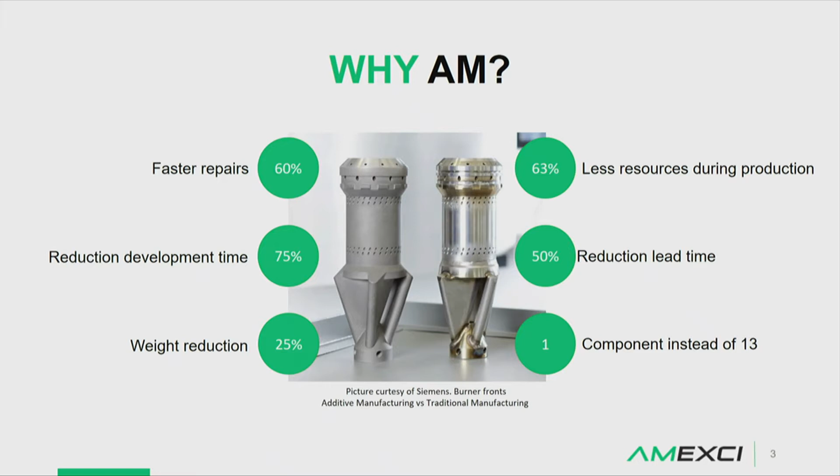What you can see here is an example where all of these nice functions and iterations have been integrated into this product - one of these bubbles is a business case in itself. But when this technology becomes disruptive is when you find all of these good cases on one single product. It completely changes your business model and how you put something on the market today.

And how does it work? I've been thinking about how complicated the pictures should be for this, but in principle, when it comes to additive manufacturing, we start with a CAD geometry of an object, then we slice that into two-dimensional layers of the same object, and then a machine is told how to recreate this object layer by layer. This is a very simple overview of it.

If we move into a more detailed explanation of the same process, you can see there are more and more things you need to take into consideration. I think it's important to highlight that this is a quite complex manufacturing process, where manufacturing the single part itself is just one step of the way. To actually use this as an industrial manufacturing method, you need to look at the entire chain end to end - all the way from your materials to how you actually verify and certify your component if you want to use it in an industrial environment.

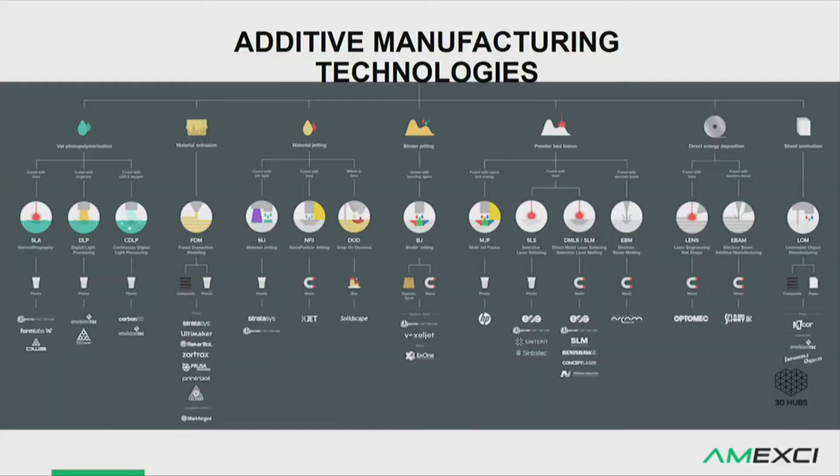Today we will be focusing very much in this area around a specific manufacturing technology that has been, I would say, an enabler for different industries, where I believe Siemens and NASA, who are here today, are great examples of how this can be gone about.

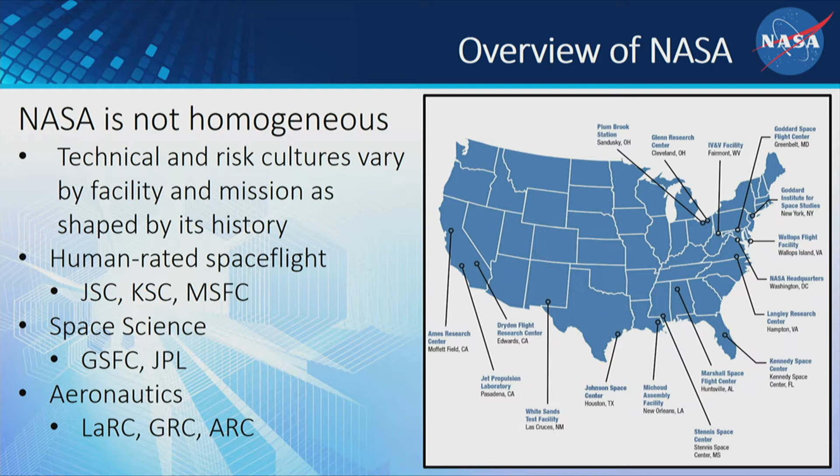What that leads to is a pretty broad diversity in technical cultures. There's a big difference between human spaceflight technical culture and aeronautics technical culture, and in how we perceive and handle risk. How much risk are we willing to take? That governs quite a bit about how we approach our additively manufactured philosophy, and how cautious we are. Those cultures are broad across the agency.

Brian and I work at the Marshall Center, so we're going to be coming at this today primarily from a human-rated spaceflight perspective. That's our point of reference.

In space-related missions relative to additive, NASA has broken down along two lines of thought. One we refer to as our for-space activities, which are efforts primarily used for access to space—rocket engines, structural components for vehicles, those types of things, essentially how you get to space. Then there's a whole other line of work relative to the actual in-space, which in the long term we believe is probably the game changer for the far future in terms of long exploration missions to deep space.

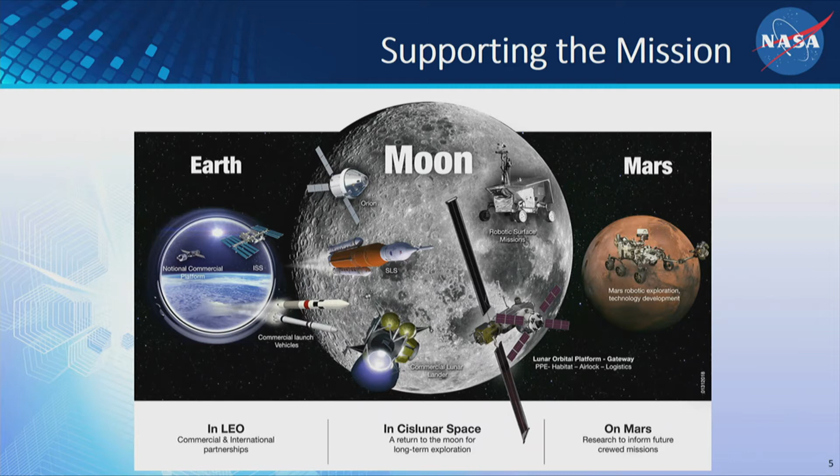A lot of what we are working on currently—the Orion spacecraft, the Space Launch System, our commercial launch guys—all of these things are leading towards continued support of the space station and then onward to near-term efforts at the moon. So those are the missions that our additive efforts are supporting.

At Marshall, we've been tinkering in additive manufacturing for the better part of 25 years. Long before additive manufacturing as a term came about, the key words were typically rapid prototyping and that type of thing. So we were working in that quite some time ago. I remember helping to string cables together from our Unix machine to a small machine from a startup company called Stratasys, who was getting started with their FDM technologies, and we were a part of some of that early work.

Our objectives in additive are the same as most any organization trying to get their hands around what additive can do for them. It's certainly a matter of decreasing production times and costs. From our perspective as a certification agency, we spend a lot of time trying to understand how do we certify a part—what does it take to decide a part is safe enough to go fly, and how do we do that in a standardized manner?

So that means developing processes and characterizations, sharing knowledge, getting data together to promote a smart vendor base, and then the standard work of additive in terms of designing well-optimized components and figuring out when is an appropriate application for additive. Not every part should be additive. There are times when additive is advantageous, and there are times, especially at this point with the hype, when organizations or designers jump to additive when they really shouldn't. So we try to help with those decisions.

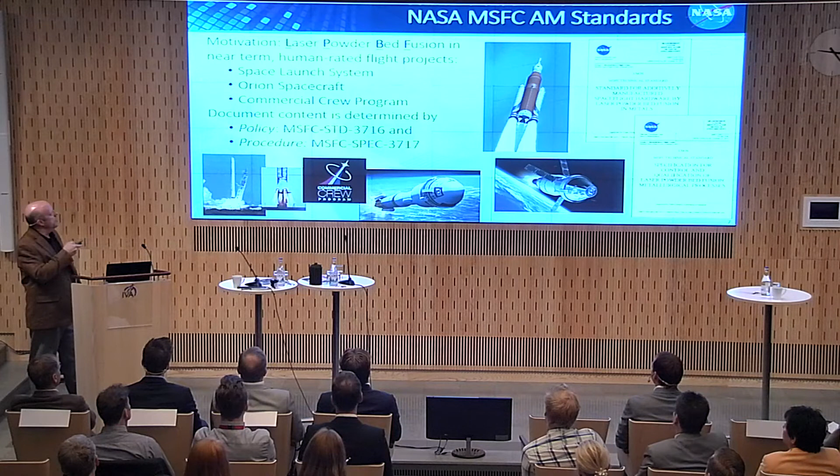These groups were really interested in taking advantage of additive manufacturing to reduce costs. One of the biggest pushes in the Space Launch System vehicle is to reduce the cost of those engines, for example—those are engines that flew on the shuttle. If you recall, the shuttle came back, so that was a big part of the development and understanding of those engines; they were reusable engines for a returning vehicle. This particular vehicle, unlike the SpaceX vehicle, is not coming back. So how do you make that engine cheaper, faster, and considerably cheaper—that's a very big motivation.

So what we decided to do was put together some standards. We needed to have a place to start, a way to frame the discussion. So we decided to take our shot at putting together a standard, and these two documents evolved from that. It took about 3 or 4 years to bring these to fruition. One is what we refer to as a standard—our Marshall Standard 3716.

And it handles things like policy. So that's where you look for information about needing a quality system in place, or how you handle material properties, or what you need to do relative to controlling your process, or providing a non-destructive evaluation level for hardware, or classifying parts, those types of things.

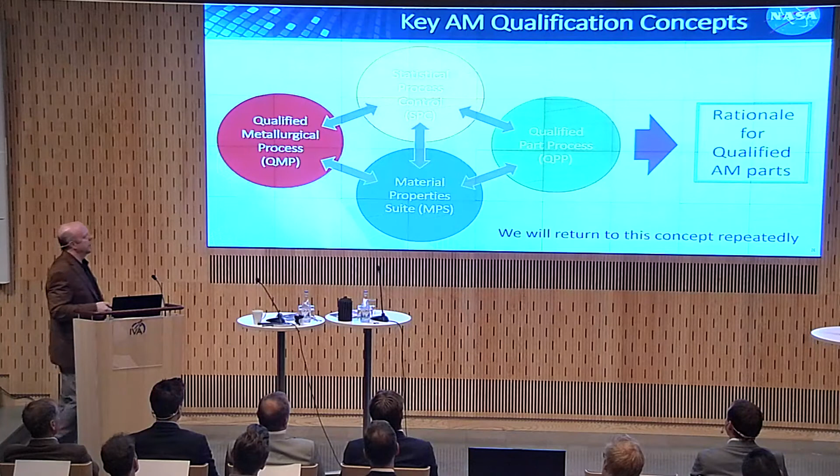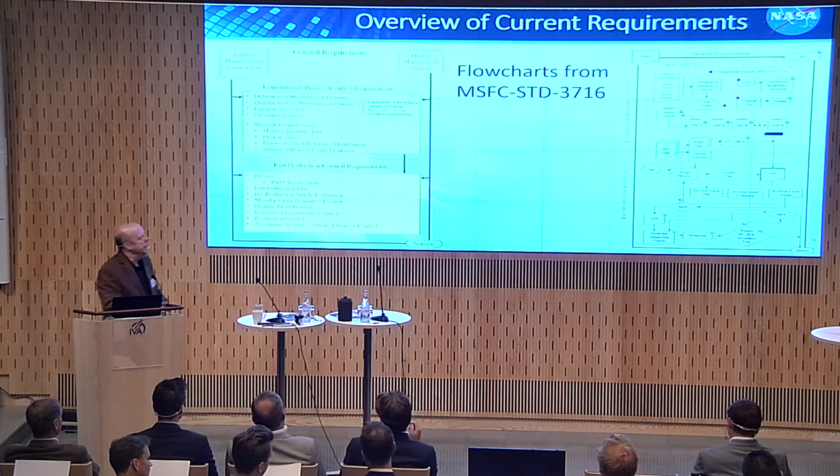So do we need to understand all of that stuff before we can use additive manufacturing sensibly? In our opinion, before you go to a point of introducing additive parts into a system of value, or certainly a system with safety implications, our answer is yes. You need to understand that.

These are concepts that are fundamental to the safe and proper implementation of additive. It doesn't mean that you have to have all of this information sorted before you begin your development and your research in additive, or begin producing parts, or begin doing development activities. We don't mean to imply that at all, but by the time you're ready to take a part and put it on a vehicle of some form, or apply it into service where it has ramifications, yeah, we believe you should understand these things. Does that make sense?

So we don't feel that you need to be able to read and see everything that's going on this screen, but these are flow charts that are in the beginning of the NASA standard, and we're going to broadly use this to guide our discussions this morning.

The first part of the discussion, or my discussion, is going to be on these, what we refer to as foundational process controls. So these are things I've mentioned before, where we talk about qualification of metallurgical processes and try to wrap our arms around how do we deal with material properties in additive, as well as things such as equipment control, quality management systems, and overall plans.

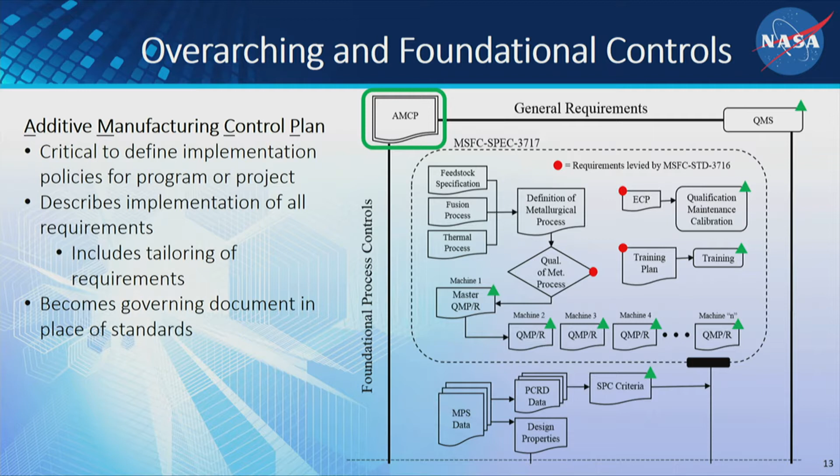So, general requirements and foundational controls. One of the things we have found that's crucial if you're going to establish an additive process at your company, or on a given product line, and say, okay, I'm going to produce this part and put it into service, is having an understanding of how you're dealing with additive in an overall sense.

Having a framework, what we think of as a control plan. In response to our documents, it means you go through and demonstrate in your control plan that you've understood the requirements and how you plan to meet them. But in the larger sense, it's primarily documentation for your organization to say, this is how we're handling additive, this is our policy, so policies stay consistent, engineers know the framework they're working within, and quality organizations understand their role and how all these things interact. So we think having a control plan is a very important item.

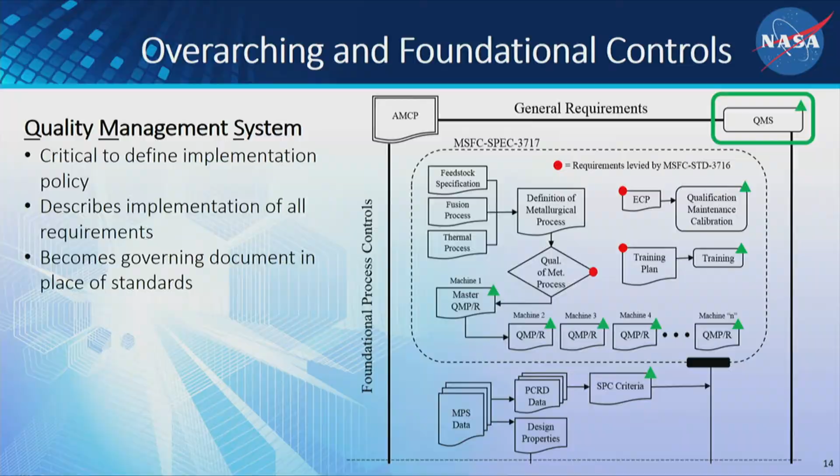Equally important is having a quality management system that is well integrated into what you're doing, both at the engineering level and the production level. In our flow chart, we show quality and this control plan as big overarching entities. Having a quality management system in place is a critical item. If you have a hole somewhere in your manufacturing process where your quality management system is not keeping up with what's going on, you have a fundamental problem. So that needs to be an overarching concept.

Equipment and facility control plans - we're going to talk about these two boxes here. It's a huge topic in the standardization world: how do you calibrate and qualify these machines, how often do you evaluate them, what exactly is an appropriate maintenance schedule for an additive machine. We require that you have a plan stating your policy for doing it, because at the moment there is not a clear answer in the standardization world. Each organization is figuring that out on their own, and from a NASA certification perspective, we allow that. We just have to know what it is, what you're doing, and if it doesn't make sense to us, we'll push back. But we have to know what you're up to.

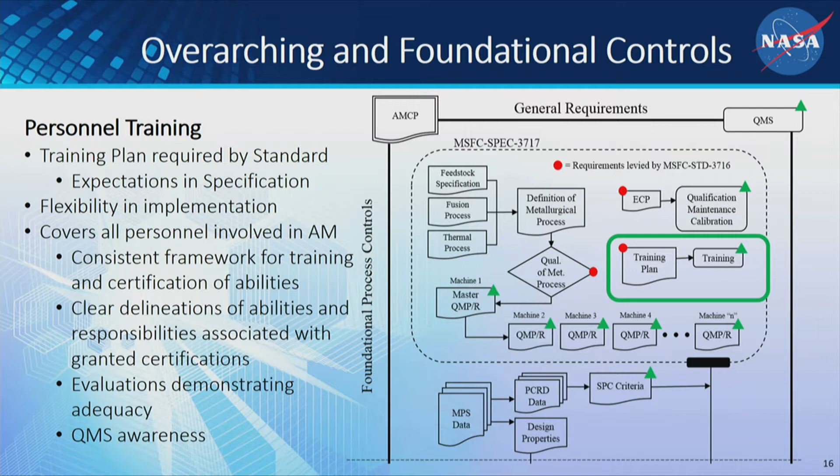So what we come up with is we define a metallurgical process. When it comes to powder bed fusion, there are metals certainly, and there are non-metallics as well. This standard is a metallics standard. Most of our work for critical structures at the moment, that Brian and I spend a lot of time with, is metallic.

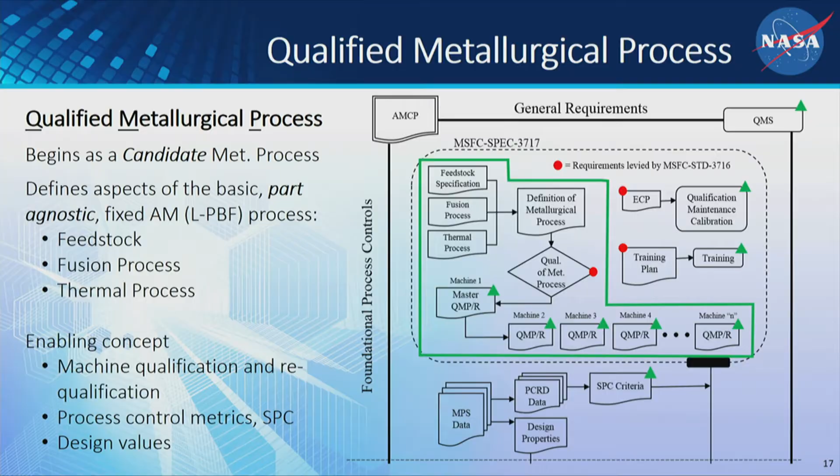But the idea is to say, let's come up with a metallurgical process that's based on 3 core items: the feedstock going into it, the fusion process, that's all the parameters we just discussed, and then the post-build thermal process. So those are the three core items that we think of as an additive manufacturing process, or metallurgical process for additive. And so once you've established, okay, I have a spec for my feedstock, I've come up with a set of fusion parameters that I like, and I have a thermal process that I believe can evolve microstructure after building the part, then I've established a definition of my metallurgical process, and I can go try to qualify it.

So that's the idea, and this is an enabling concept for us, the way we think of this, because having these items defined and qualified and having metrics against them, that's what enables us to work the other problem areas, such as machine qualification and requalification. How do you set up process control metrics? How do you come up with design values for your engineers to use to put into parts? So we consider this to be a very kind of enabling and fundamental concept.

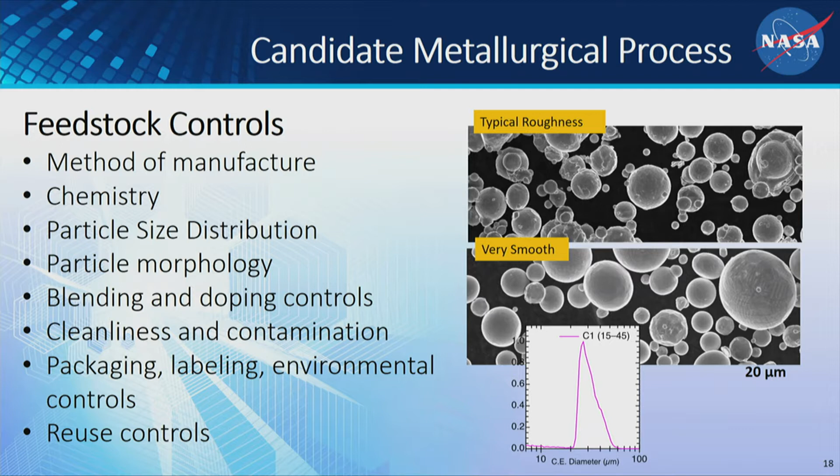So we'll go through those 3 core pieces very quickly. Feedstock controls. There's a lot of work going on in how do you understand powder for powder bed fusion type processes. At the moment, we've taken kind of a loose hand on that and said, we have a number of things that we want you to control relative to your feedstocks. We're not going to tell you what those controls have to be per se, but we say you do have to, for example, understand how your powder is being manufactured, chemistry controls, particle size distributions, morphology or shapes of particles, blending and doping controls, cleanliness, contamination, how you package it, label it, environmental controls, what you do relative to reuse if your environment has reuse of powder and that kind of thing.

So we have these controls in place and require that fundamental core piece to be defined and fixed relative to that metallurgical process. The next piece in our candidate process is, how do you come up with the fusion parameter set that you believe is going to work? So there's an image stolen from Fraunhofer that's similar to the one Edvin showed relative to the powder bed fusion process. So how are you setting power of your laser, scan speed, all of those types of things relative to your process?

And what's most specific about our metallurgical process is that we tie this all the way to the serial number of machine. Okay, so it's not generically, oh, I have a make and model of this machine, so therefore I come up with a set of parameters and I can dole it out to anybody who happens to have one of those machines and assume that I'm good. We don't do it that way. We have a candidate process, and then we qualify each machine by serial number. So those fusion controls, there's a long list of things that are in it. Everybody is, folks are likely aware that the quantities of settings that are available relative to this scenario are scores.

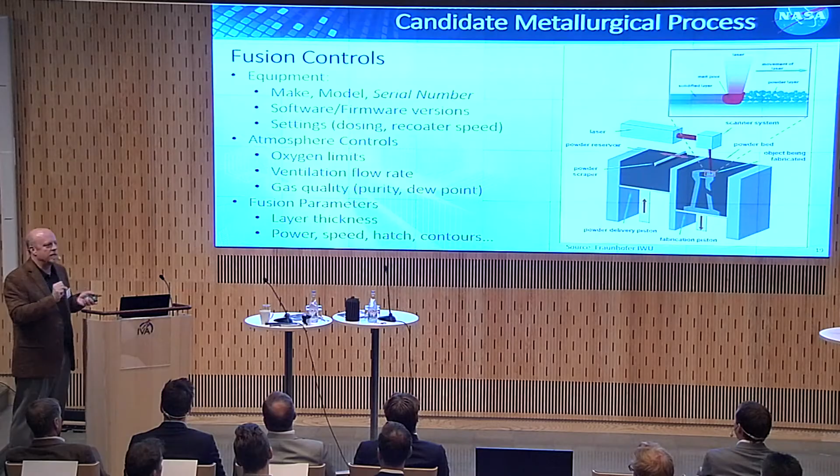Ventilation considerations. Brian and I have been tripped up by ventilation problems probably as much or more than anything else. How are you ventilating the bed where all of this process is going on? Some of the alloys we work with have a tendency to produce a good bit of soot, which interferes with the power of the beam getting to the bed, creating defects and causing problems.

So things like ventilation and quality of the gas are very important. We put those together into one box that we call our fusion controls, and we ask that all of that be well defined and well locked down.

The other fundamental concept behind fusion controls is that the additive machine works on the idea that I specify a power, a speed, a layer thickness, a set of parameters. I may have multiple sets of parameters - for example, a set used when the machine is making the outside surface of a part, and a different set when it's filling the inside to fuse the solid and make the part solid. But it's still a fixed set of parameters for different conditions - I know what they are, and it's going to do the same thing each time.

What I need to keep in mind, though, is that not every part is the same. So those parameters need to be what we think of as well centered in a process box.

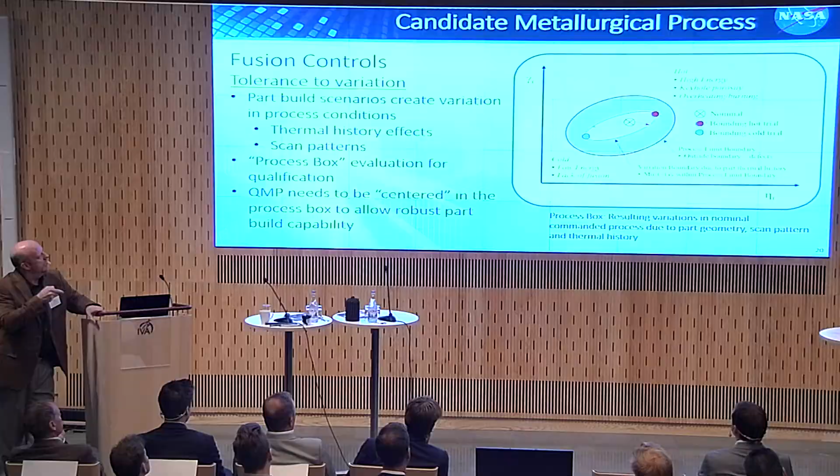If that X represents where I'm going to operate my machine for a given set of parameters, I want to make sure that when I declare my process, this red line - in this kind of pseudo process space, representing various parameters that might change the process from being hot, with high energy leading to things like keyhole porosity or overheating and burning, versus cold, with lower energy leading to lack of fusion defects - I have this box, so to speak, a parameter box.

I want to make sure that when I place my set of functioning parameters, it's well centered within that box. Let's think about it that way.

I don't want to have a set of parameters sitting right over here on the edge, because if I have a geometry in my part - say a part with very heavy sections where the laser is going to be spending a lot of time in local areas and heating things up - then even though the process looked good when I qualified it, when I did my part it wandered out. I don't want that. I don't want that at all. So what I want is a process that's well centered in this box.

So that it can tolerate a number of different part geometries and scenarios when I'm building, so that my qualified process is as robust as I can have it. So that's the other idea I wanted to get across.

Brian is going to talk briefly about the idea and some of the challenges of very interesting work going on - kind of the final goal of a lot of the additive developers - which is in situ process monitoring and the ability to do real-time control of processes. We're excited for that, but it represents a challenge to us, as Brian will talk about.

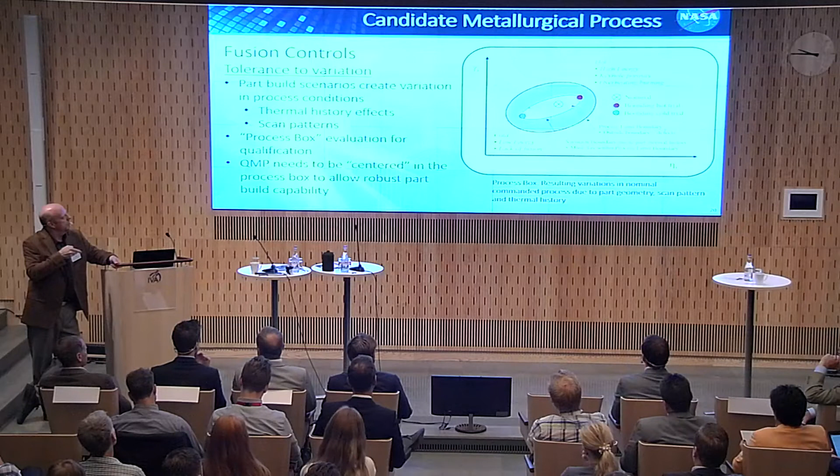So that's important to keep in mind relative to our ideas, that we work on a fixed process, and that we work hard to make sure that that's centered in the box. And then, as Brian will discuss in part controls, you got to go back and verify that on any given part that you come up with, your approach to build an additive.

Yea, verily, where I chose to operate produced the part as I intended it to. So there's two parts to that. Thermal process, just very quickly: we are not fans of putting parts into service with the microstructure that is created by the additive machine. Microstructures that come out of the additive process have these interesting features. You can see literally weld beads, crisscrossing, and all that kind of thing going on. Very complicated, often non-equilibrium microstructures. We're not a fan of putting those into service.

And so we have a generic requirement from our thermal process. We consider it core to the metallurgical process that you're not done when you finish building the part. You've got to have some way of evolving that microstructure. How do you move that microstructure from this very high residual stress scenario, with segregation in elements and all of that kind of thing, to something that is more appropriate for service conditions?

And so we consider that to be an important part. So once we've established it, what I've told you about are the core pieces of what we think of as a candidate process. What you got to do, if you get the candidate defined, your next step is to qualify it. How do I qualify it and decide that that process is actually good? So we have maybe three steps to that.

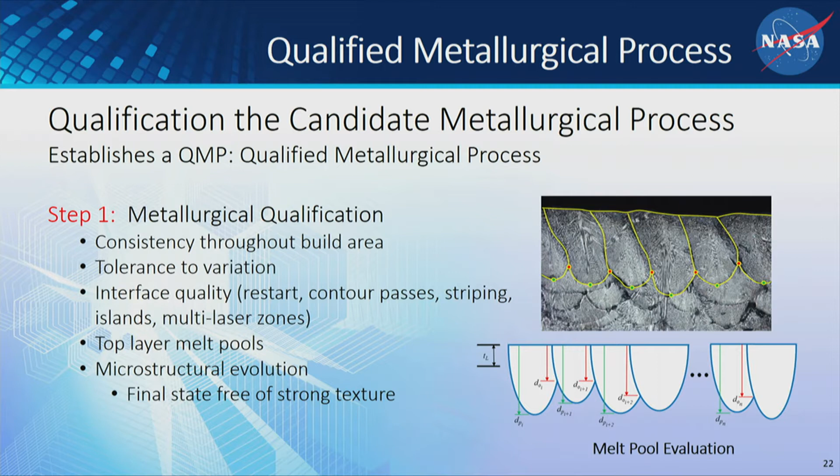One is metallurgical qualification, and that has to do with understanding how good am I actually building material at the metallurgical level. Do I have consistency throughout my build area? If my build area is, say, 200 centimeters square, how do I know that all of those areas are producing material of equal quality?

Understanding, like we discussed before, tolerance to variation. In other words, I don't want to qualify my process where I can build little cubes, great, or I can build a tensile sample, great, but I can't build a thin wall, I can't build a thick wall, or whatever. So we've got to understand, can it tolerate variation?

There are a lot of interfaces in additive parts when you get down into the understanding. For example, I talked briefly about contour passes, which are the passes that the energy source will make around the outside of parts to create a surface. How you have the interface between that and your fill areas, that's very important. It's a great place for porosity or defects. Certainly things such as if you have a machine or a part scenario where it requires a restart of the process, that's a critical scenario that's got to be qualified.

Methods of filling, whether it be EOS uses the term striping, islands are used in some of the Concept Laser machines, where the machines are quickly moving to the point where we're going from a single laser to multiple lasers. And so now you've got the concept of: are the lasers going to share the burden? And if so, how do they negotiate that? And do they negotiate that well? And do you end up with problems? So all of those types of things are important to us from a metallurgical quality perspective.

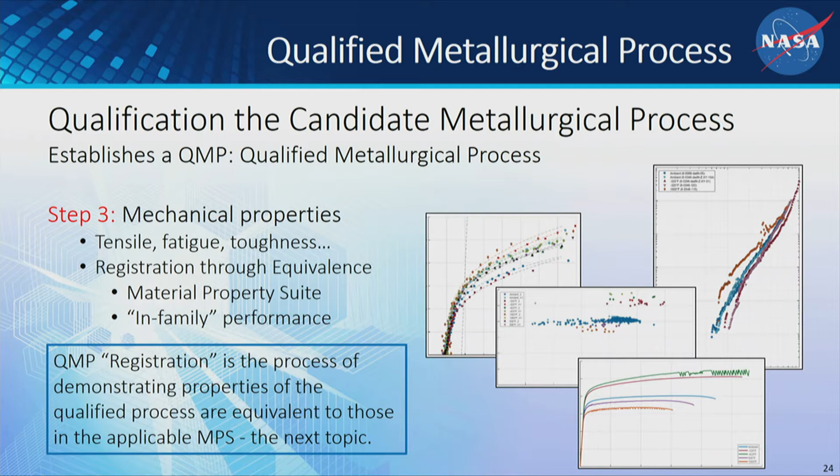And thirdly, if you're qualifying this metallurgical process, you've got to understand the properties that process renders. So by the time I have built my material, I've ensured that it has good metallurgical capability and provides good surface and detail resolution. Then you've got to decide, does it have the properties? Can it actually do its job for a given part? And how do I figure out what those capabilities are to convey that information to my design community so they can understand their capabilities, and that we've qualified a process that can survive the environments we ask it to.

In order to do that, we focus very hard on this idea of a material property suite. It's a little bit new — not a new concept by any means, but integrating these concepts is a little unique, particularly in the metallics world. It's not that unique if you're talking to the composites guys who work in process-sensitive materials and realize things might be different each day if they're not careful. They're kind of used to dealing with it.

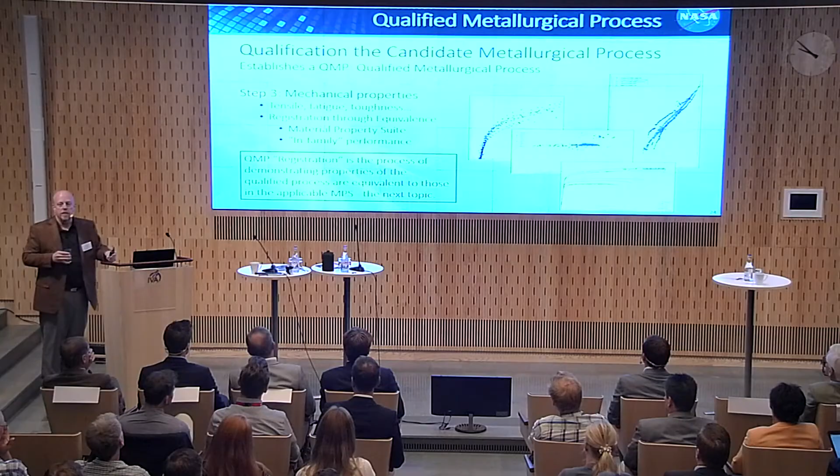But what we've decided is that we need this kind of material property suite. The idea is that when you're registering your process, when you're registering your candidate by having it qualified, this registration process is how you demonstrate that the properties being produced by that process make sense relative to my design values in my bigger space. So that's tying things together.

So the material property suite, the way we've devised it — and again, I'll throw the caveat out there, this is how we're working the problem, it's not the solution, but it's how we're working it. This is a scenario that, again, we find the standards community thus far is not tackling. There's a material property community within the United States that handles development and standardization of methodologies for materials for aerospace applications, which is wrestling with it, but that's the only organization I know of actually trying to work this. Generally speaking, this is worked internal to companies, and the degree and rigor to which they handle it tends to vary with the culture of the company.

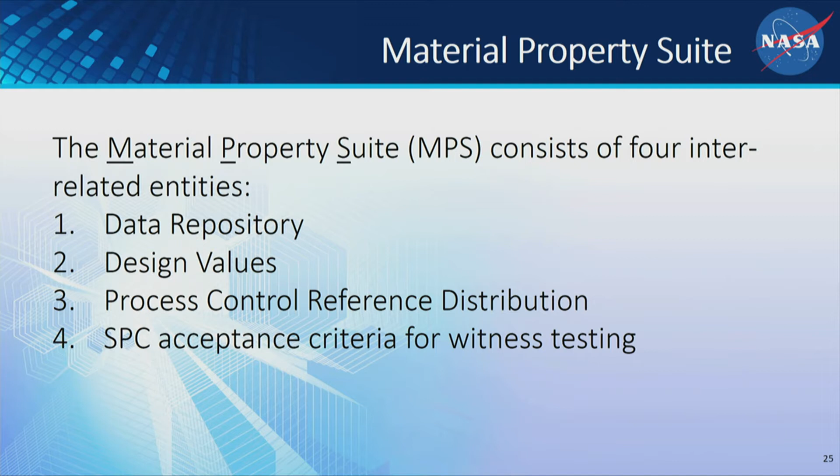So we have four items in there. We have basically a data repository — that's where we have all of our data sets. We come up with a set of design values; that's a core piece of this suite. This idea of a process control reference distribution is pretty critical — that is, how do you understand what the nominal in-family behavior of your additive material is? That's going to be a decision maker for keeping processes in check and supporting the rationale for using a given set of design values. And from this reference distribution, we set statistical process control acceptance criteria for witness testing and other purposes.

So that's the idea. The data repository includes data from all kinds of places, whether it be qualification testing when you're building up your fusion process and you've locked it down and you're qualifying this process — you have all of that data. You also have material characterization activities that go on explicitly, so you need things like crack growth rate curves for a particular material. Ideally, you're not going to invest in these types of things until you have a qualified process.

We see that turned upside down quite frequently, where people generate all of these types of data — fatigue data, crack growth rate data — and you ask a general question going back: well, how did you qualify that process? Why do I know that process is good? Why is that data good? And they're like, well, we didn't do that, we just started characterizing. And so then you kind of start backing up.

But you get this data from a lot of different places, what we refer to as pre-production article evaluations. That's an important source of data, because that's taking data literally in situ out of parts that you've created. That helps you understand the correlation between coupons from generic material characterization versus the quality of material that actually came out of the part itself. Are they actually the same? So that correlation is critically important.

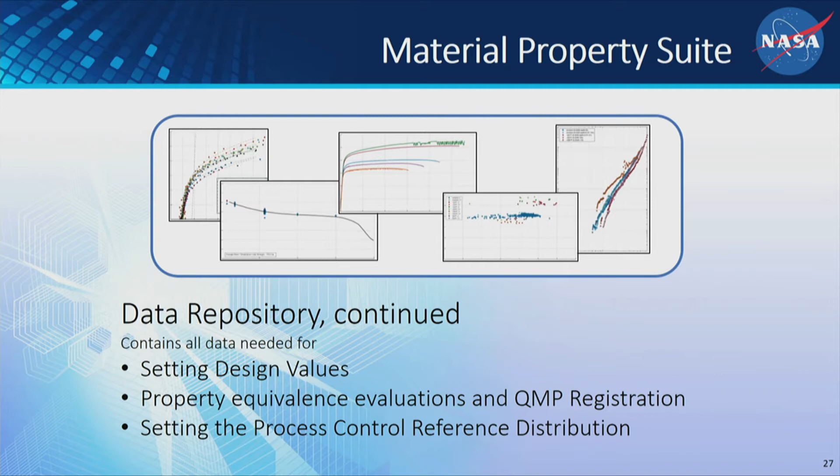The other aspect to the data repository is it gives you the data necessary to set your design values. You want your design values to be reflective not only of characterization data that came from coupons, but you want to make sure those design data also represent data coming out of parts and other types of geometries. It's a process-dependent material property — it can be. We try to minimize that through the metallurgical process we described, but you still have to understand how those properties vary.

By incorporating data from all types of sources when setting design values, that's the approach to take. The repository also gives you the data you need to understand this equivalence concept. When we say equivalence, we mean I have a set of properties generated from my new machine that I've qualified. How do I decide whether those properties are appropriate to use in my design space, and that all my prior design values still apply? We need some way to do that. We can't restart our design value efforts every time a software version rolls over or a new machine comes in. Additive technologies are moving too fast for that, so coming up with equivalence measures is very important.

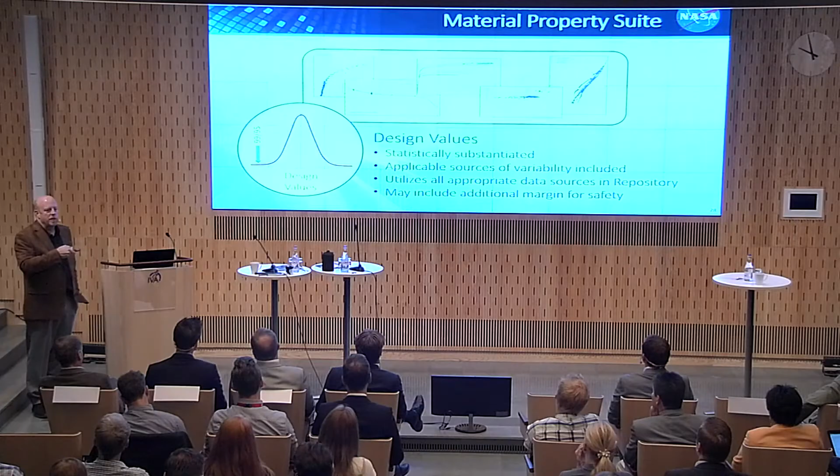Those are basically statistical evaluations to show equivalency between data sets, so design values from the data sets are statistically substantiated, typically down at the tail of a property distribution, at the 99 or 95 limits, where they're defined to lie. We include all applicable sources of variability when looking at design values, like coupon data, pre-production articles, characterization data, witness data, etc. And if you're smart about it, at this point in additive, you're not going to tune that right to the edge. You leave yourself a little room for learning something new, because that's going to happen, guaranteed.

The other thing we do is what we refer to as process control reference distributions. It's an important concept to us, one we're hoping will show up more in industry standards. It's not terribly unique—it's basically coming up with a descriptor of this larger data pool that says, relative to the witness coupons, what does the process look like when it's in control? What is the average value it produces for a given property, and how much scatter is typically there when the process is in control? Understanding that family is very important to us.

And three minutes? Okay, I think we're not too bad. Not too bad.

The idea is we want some sense of mean and scatter, so that going forward, producing parts on a daily basis, we have a way to say yes, that process is in control—I'm looking at it and it is in control, it's in family with prior work. What we'd like to avoid—well, let me cover this real quick—based on that, gives us this SPC criteria for witness testing.

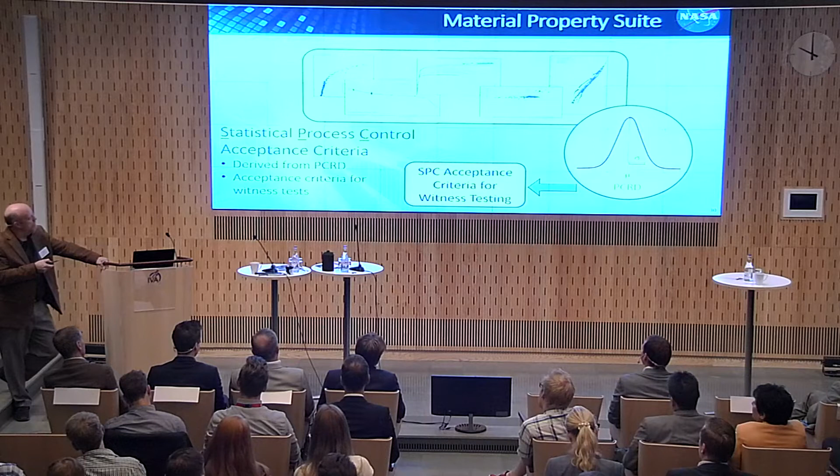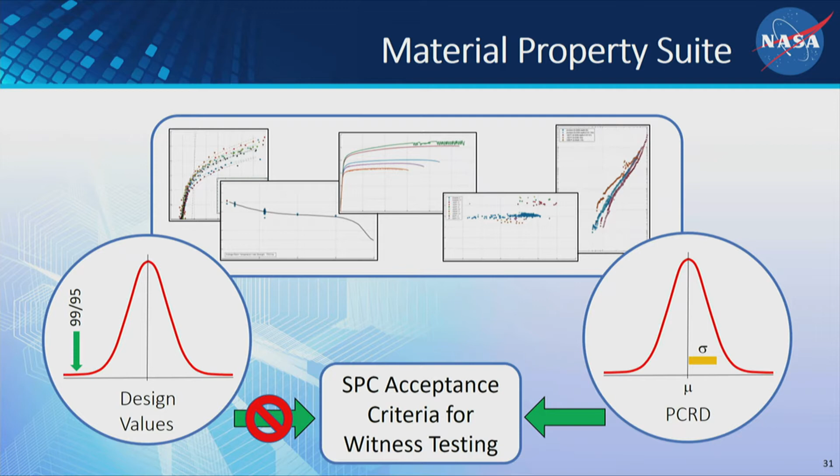What we find too often is that the acceptance criteria is tied to these design values or to some minimum number. In other words, they say, well, my guys are designing to this number X, so I'll pull a tensile bar, and as long as it's greater than X, it must be good. That's the concept we're not excited about, but that is the tradition, honestly, in metallics—not as much in the composites world, but in metallics it is the tradition. So we're swimming upstream against tradition trying to change that.

The problem, particularly if you literally set it against a design value, is that this is set way down here—it's a low, easy bar. And quite often, for conservatism, we even add some pad to that from a design value perspective. So what that means is my process can walk all over the place before I flag it. In other words, I can really move the mean of that population before I flag it. And we don't like that.

We think it's quite important to say, I know what the family of data is, and I'm going to watch my witness testing on an ongoing basis and plot that against it. It's the control chart scenario, SPC, Statistical Process Control 101. That's all it is, we're just asking for some of that to be incorporated. You wouldn't think that would be quite as big a deal as it is, but it can be hard to force folks to do that because they're not interested in all the logistics, and it's a challenge.

So the idea is not to base our acceptance on these spec minimums, but instead come up with, for example, an acceptance range on mean, an acceptance range on variability, maybe a limit on the lowest single value, and use that family to understand how your process is doing, not just saying, oh, it's greater than the green line, it must be good. That's our idea.

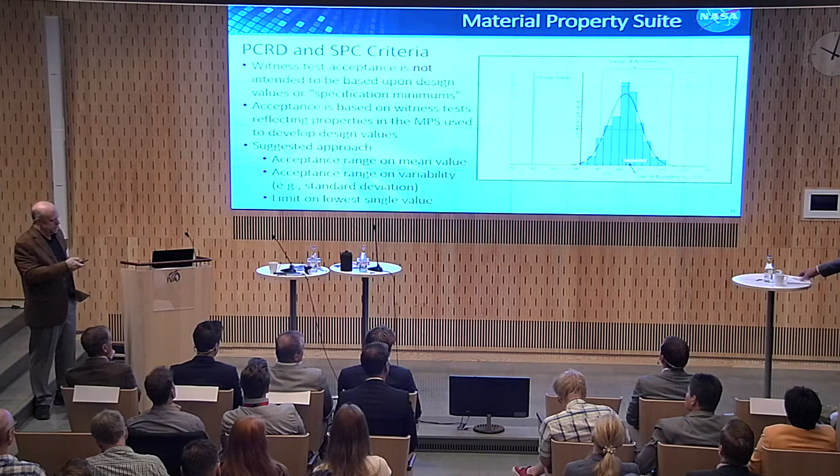So what we've done here, we've talked about qualifying a metallurgical process, feedstock, fusion controls, thermal processing. Get ourselves a fundamental process that's producing material we like and that does so with flexibility, so it can do it not only in a cube or a coupon, but across a large array of environments, thermal environments, part environments, and that kind of thing, so we have confidence that in general our process will produce good parts.

Utilize the idea of understanding that process and putting it under control, and tying the material properties back to that metallurgical process through what we refer to as that registration, and monitoring the properties through SPC. So we end up with this triad, and that's how we decide we're going to keep our process in control, and substantiate a given set of design values that are in use by the engineering organization. So that gives us a few check marks on our checkpoint here.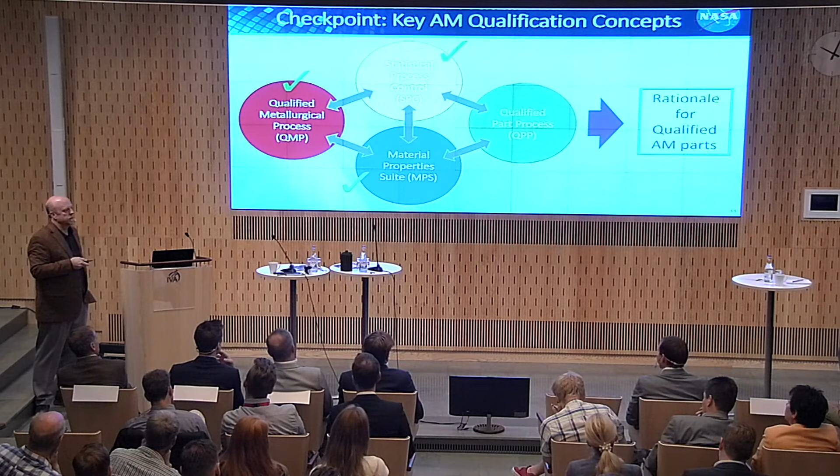And what Brian is going to do, he's going to pick up and say, okay, how do I take this concept and move it into real world parts? How do we take all of these fundamentals and start making real world parts out of it? So that is where we are.

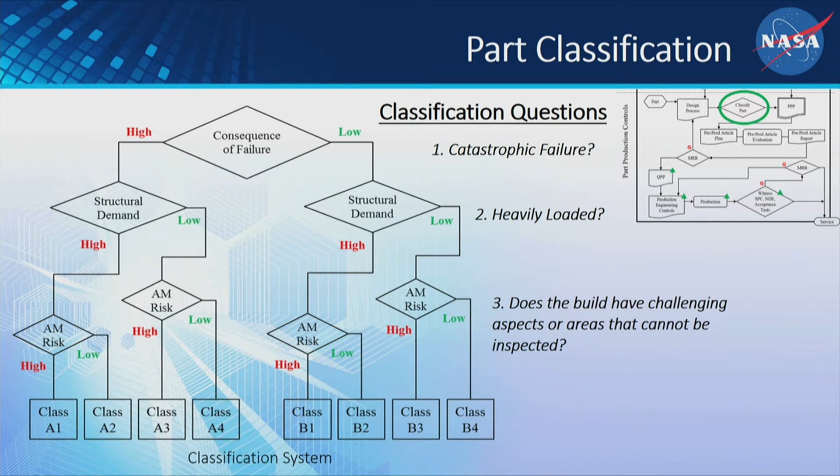And sorry, I didn't point this out earlier. We're kind of following along the flow chart right here.

So for us, it's a risk communication tool. We have many partners, both on the commercial side and on the launch vehicle side, and everybody has a different take on how much risk is too much. But our program guys who are buying those launch vehicles need to understand how much risk they're buying. So we were looking for a common communication tool.

So each one of those check boxes, each one of those levels has a table in the specifications associated with it, covering whether you're high structural demand, how much you're pushing the technology. This is focused on powder bed fusion, so the rules for AM risk are kind of set towards that, but those can be tuned for different additive processes. So we can look at an A1 or a B2 and tell how it fell down that flow chart, so we can quickly communicate that risk.

And part-specific tailoring does start with the classification, because if you have a highly loaded piece of turbo machinery in a hydrogen turbo pump, that's a very different story from that simple bracket. So how much you'll allow that tuning of the requirements really starts here.

But a lot of challenges started off right off the bat with this classification system, because as a disruptive technology, the very first people who wanted to employ additive were the science guys and the spacecraft guys. This is a manned space flight spec, so we were looking at liquid rocket engines first and foremost. But the CubeSat guys, the science mission guys, they called first and said, well, we have a smaller program, we don't have the resources to do all this. How can we tailor those requirements? And that challenged this paradigm of part classification.

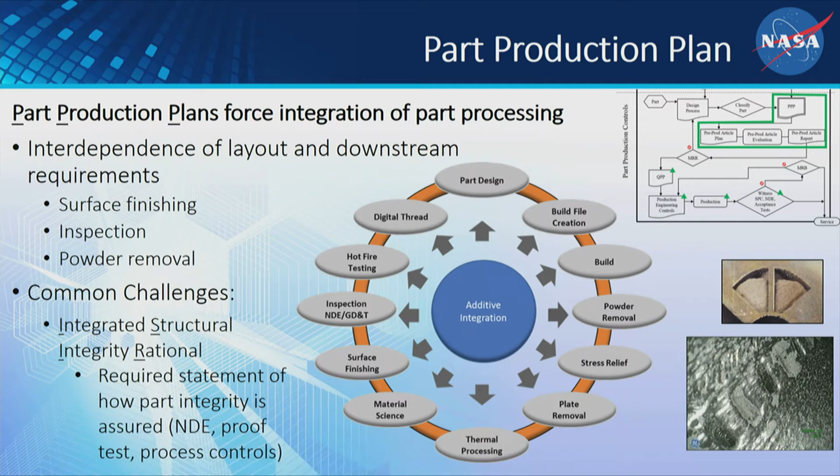One of the other things that's bit us quite a bit: people say, all right, we can get this part into the design space, but we need to figure out how to get the powder out of it, how to clean it out. Because if you have a blocked chamber and you cannot get the powder out of it, you end up with a block of sintered powder inside your part. Whether it gets HIPed or gets heat treated, that's never coming out of there -- that part's scrapped. You can make really nice, really cool coolant channels in a part, but if you can't get the powder out of them, you can't use the part. So you have to take all of that into account when you're setting up your process and setting up your part design.

So we've had a lot of challenges as we've started to implement additive at NASA. And a lot of the requirements in the specs, I can look back and say, yeah, that one hurt when it bit us. So our mistakes have often been codified into these requirements.

As we go through and set up this part production plan, it's our integrated approach: how do you take that entire program and lay it out end to end, cradle to grave. How are you processing that part to make sure, if you have an area that's hard to get the powder out, how do you get it out of there? How do you lay that out to make sure someone doesn't send it to an EDM before you get all that powder out?

One of the big challenges we were surprised by was one of the things we asked for in that plan: an integrated structural integrity rationale. Give us the short story of why you think that part is good enough to fly. Summarize your NDE, summarize your structural analysis. Getting people to do that succinctly, and make sure they understand the rationale of why their part is good to fly, has been a challenge, rather than just saying 'my analysis is good, check that box' or 'I'm able to inspect most of it, check that box.' Making sure you have all that covered has been challenging for folks.

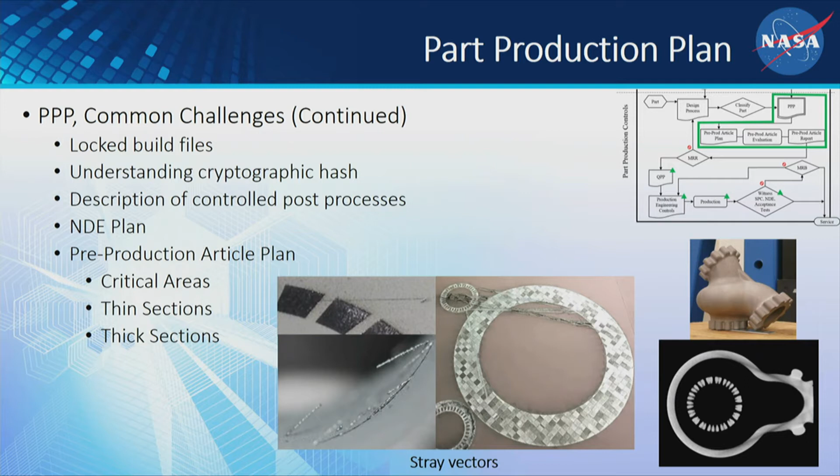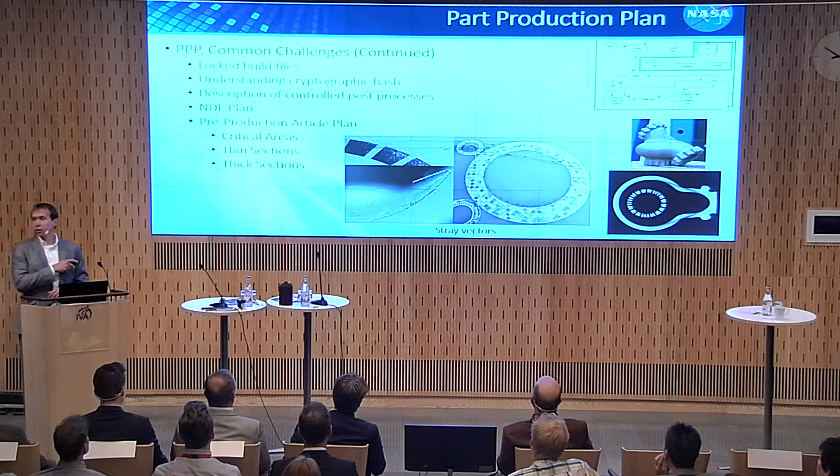You cut up parts and you look for things like this. Once you reslice that file, you can no longer guarantee things like this haven't come up, and they've come up more than once in a copper alloy system. You can see a lot of vectors back and forth, and those parts aren't supposed to be connected. We still cannot explain how all these vectors got there, just a glitch in the file structure when those slicing files were made.

We'll talk a little bit about the digital thread later on, but to control those files, we push people to use a cryptographic hash program to make sure you're using the right file. File naming conventions can change, things can be corrupted. You need to make sure you're using the right version of your file.

NDE has been a big thing for us because CT is a powerful tool for additive, but it's not certified that you can find a certain size flaw. So you have to do it on a part-specific basis. Getting people to really understand NDE before they try to put the part in the system is critical. A lot of people have taken for granted that CT will find any flaws they can't screen. Well, maybe not, because we can take an injector with 160 pieces and make it into 3 pieces, but now CT cannot penetrate 9 different surfaces of nickel alloy. You just can't get there.

So we push this first article inspection, very similar to castings: you make your first one, you cut it up, and you look for porosity. That's similar to what we're doing, because a thick section has a tendency to have different porosity, perhaps different microstructure than a very thin section. So you need to understand those.

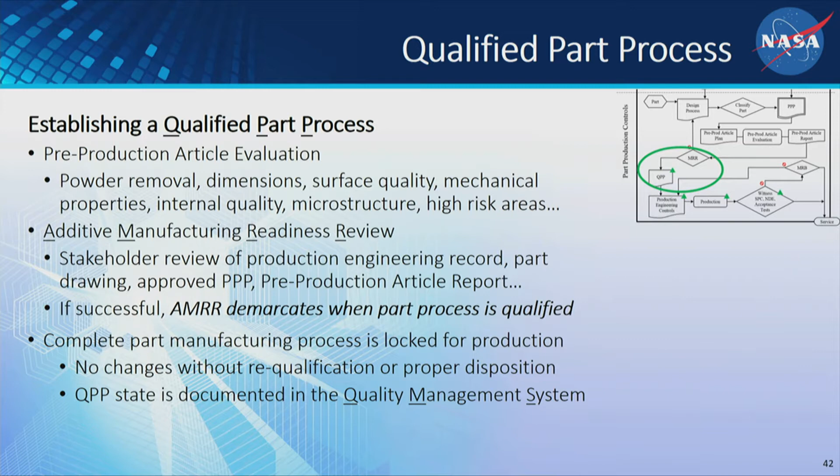It's made with that QMP on that machine at that facility. If you want to add a different machine of a different serial number that's not part of that QMP, you have to redo that first article plan to lock that process, because we've seen variation between a Concept Laser machine and an EOS machine. We do see differences in the way these parts produce, and it's important to understand that to make sure you're getting the end product you think you're getting.

I know I blew through that rather quickly, but that gives us this qualified part process at the end. That circle I put up earlier is a highly integrated process. Each part ties back to its predecessor and back to the very beginning. We have found things in a first article inspection plan at the very end, and we've had to go back to design to change a cooling passage size.

That leads you back to another design cycle, which was at the very beginning of that loop. So it's not just something we can go straight to additive and do. We need to make sure we close that loop as early as we can, with manufacturing test demonstration hardware and other things, to really look at the hardware and understand it going forward.

So we're through this. We're at this QPP state right here, meaning we have a qualified part process and we're getting ready to go into production. As Doug alluded to earlier, with each part we place in that build file a high cycle fatigue tensile specimen, metallography specimens, and those little blocks with the features he showed. We place all those in there, and that's how we monitor our builds going forward.

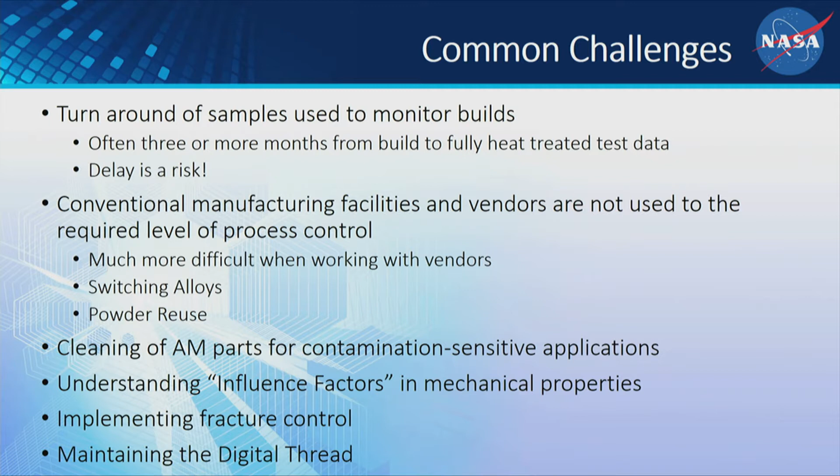And if that fails, when did your process go awry? That's what Doug was alluding to. If you set your boundaries so low, you can pick up the drift, because if you pick up the drift, you can start correcting it before you start scrapping hardware.

And that's something we've been bitten by, unfortunately. We switched alloys, and it was 6 months before we scrapped about 6 months worth of builds before we got that thing fully cleaned out. At the time, it was 4 months or so before we saw data, and by the time we got it fixed, it's a big problem. So we try to watch for that.

So a lot of the vendors we work with aren't used to this level of process control. People are like, well, it's just another machine. It's not quite at the level of a CNC machine yet. It's not that user friendly. They're not used to doing a lot of this process control, and they just don't want to do that.

Well, you kind of have to, because these things shift, and they can shift quickly. Filters can plug up, ventilation systems can go awry, and any number of things can happen to laser calibration or laser power that you can't catch visually, but it will affect the microstructure greatly.

And if you're depending on the alloy of your powder, reusing it can be an issue. Nickel alloys are pretty forgiving. Copper alloys, not so much. They're very sensitive to oxygen pickup, and so are the titaniums and aluminums. So you can't reuse that powder quite as much. Unlike a nickel alloy, which you can run in a machine for quite a while, we're studying that right now.

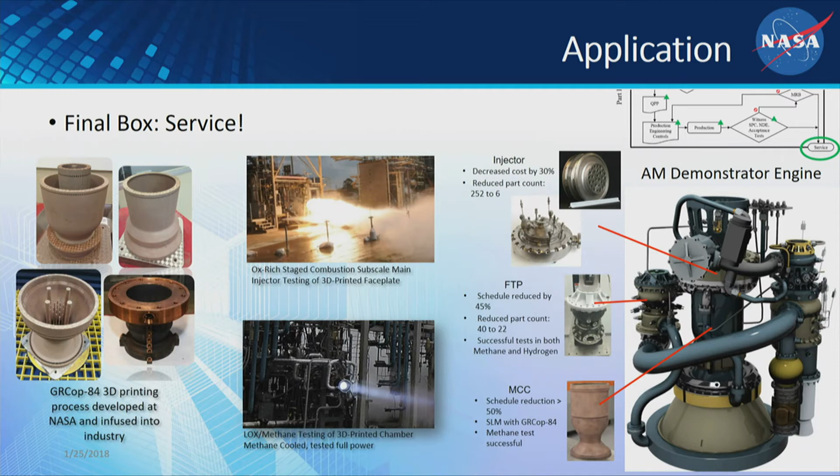One of our good test bed programs out at Marshall for trying to teach our engineers additive, we need to give them hands-on experience. So we have what we call an additive manufacturing demonstration engine, launched with the intent of trying to build as much as you can out of additive, take a very, very high-risk posture, and see what you can do. See what you can break. Test it. And they should be testing that complete engine hopefully this fall.

They've been breadboard testing components over the past couple of years and very successfully running that fuel turbo pump in both LOX and hydrogen and methane. So turbo machinery and turbine blades and everything made out of additive. So it's been a great program for our engineers to learn about the technology.

The process control, the in-process controls are very important to understanding what you're doing. You have your QMP, your part production plans. Those really help you understand what your process is. And we do things like a process failure modes effects analysis, trying to go through and understand how our process can fail and monitor that through the statistical process control as much as we can.

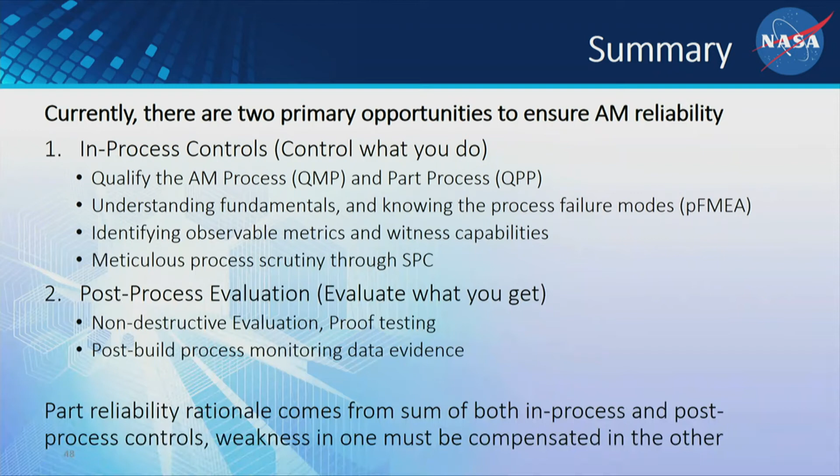And then in post-processing, we get into the NDEs and really inspecting these parts. Because right now we look at 100% inspection. Until we know more about the technology, until in situ monitoring comes online, we really want to understand if there's a rogue flaw, a rogue defect, or if something's gone wrong. And the reliability comes out of the cross-section of these and where these components come together.

So by the time we circle back around, something way out here at the end as you're going into flight affects your QMP, affects your material properties and your process control. This is a continuous cycle, and that is a paradigm shift for all of our manufacturing. So thank you all for listening today.

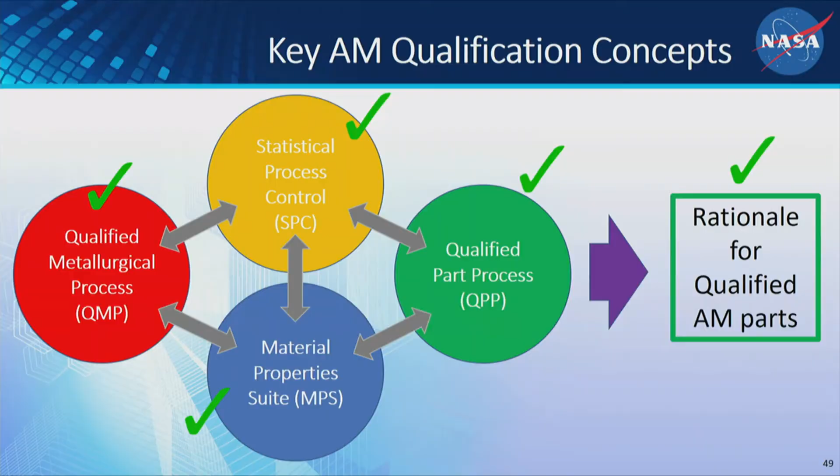I have a few questions. Could we please have both of you on stage, maybe, because I don't know which one of you will answer the questions. But anyway, thank you both for great presentations. My impression is that this is not as easy as it sounds from the beginning, but you've definitely done a great job at NASA.

Clarifying these processes and also documenting your findings in the two documents that you described. But in practice, in this room we have representatives from a lot of industries, a lot of companies who are on their AM journey somewhere. And yes, they can download the documents and they can learn a lot of things from that. What else could they do? Could they call you guys and say, 'Hi, we really don't understand exactly how this is done,' or send you an email or whatever? Are you open for that kind of discussion at all, or how do you get the deeper knowledge?

Yeah, we have a lot of folks who call and ask questions, particularly about concepts in the documents, concepts like we discussed this morning that can be hard to grasp. Standards documents are not known as the easiest things to read. Maybe not the bedside reading of choice for everyone.

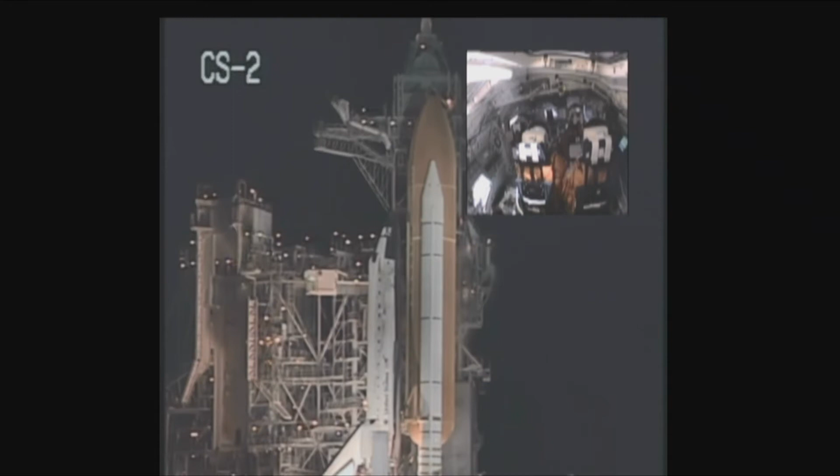This is actually when I'm launching on my very first space flight, 1 out of 2, in December 2006. As was mentioned before, these engines down there were reused on the space shuttle, but now we use them for the final time on the SLS, and then they had to build new ones. It's a very powerful event here - some 2,000 tons getting to space and some 50 million horsepower, you can say, which you can point out. Someone brags about their new car with a few hundred horsepower.

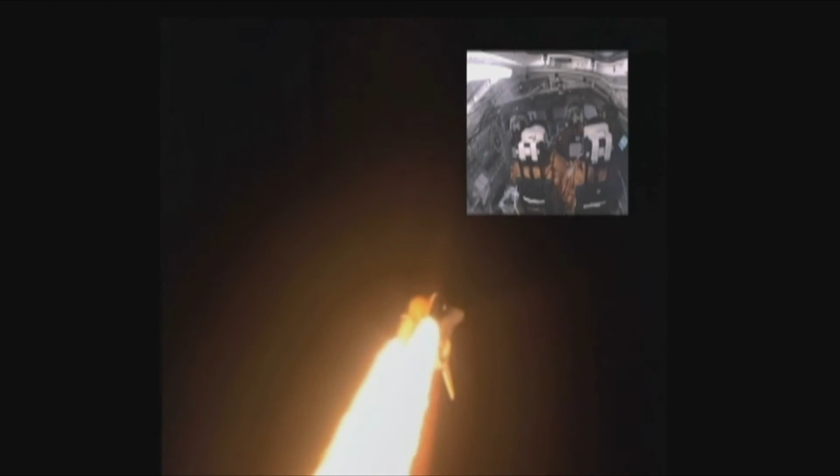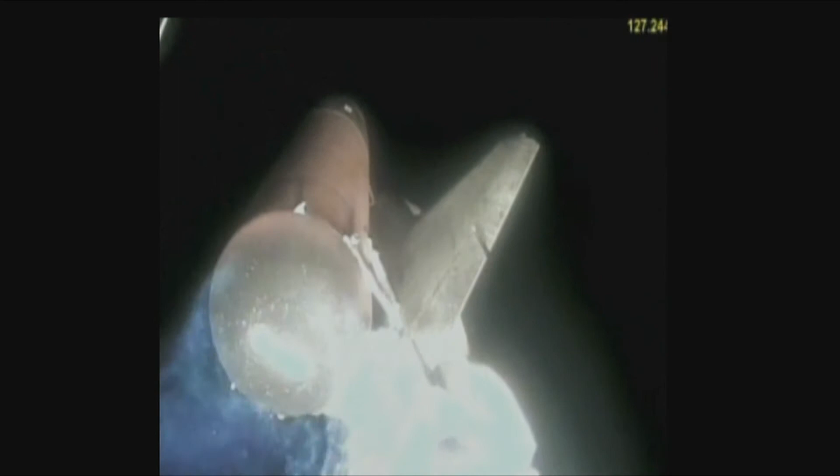But anyhow, we were on our way here on a mission to continue building the International Space Station. At this time, the space station had started to be assembled in space already in 1998, and from 2000 onwards it had been permanently manned. It was more or less halfway in this build-up process when we launched here. By the way, this whole launch sequence takes only 8.5 minutes - that's how fast you go to space. It took another 2 days before we docked to the space station.

That's maybe because we wanted to make a kind of slow approach and not go so fast. So on board were 3 people living there at the time. One was a German colleague of mine, Thomas Reiter. As I said, our main mission was to continue building the space station, which we did already the following day during the first spacewalk.

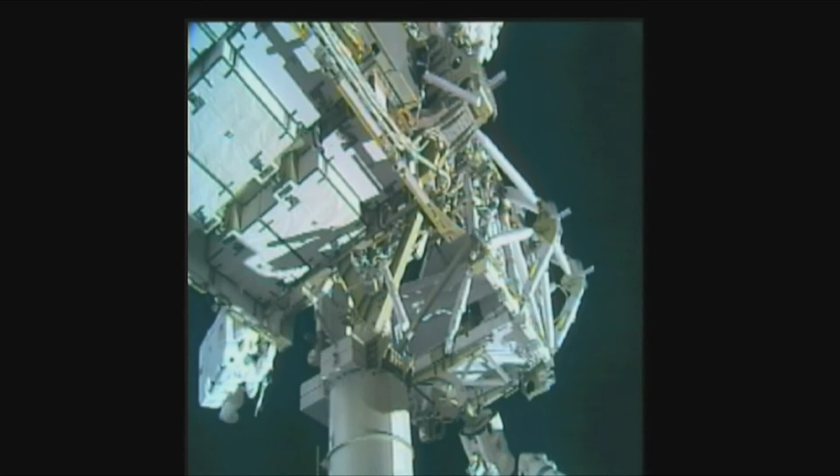So we had with us a piece in the shuttle, this one here, which was brought out with robotic arms to the end of the space station, and there we prepared it, and then we secured it in place using, among other things, these kind of battery-driven bolt drivers.

However, the following day, we were going to retract this solar array with the help of commands from the inside. But as you can see here, it didn't really work out as planned. This led to a problem, which the ground control in particular had to try to think about. How can we solve this?

So this is a close-up picture of how it looked after many attempts to try to fold it with commands from inside. We went in and out and it didn't really work out. Now I can tell you, the problem was actually these guide wires here, where some rings didn't glide smoothly through. But that's a side thing.

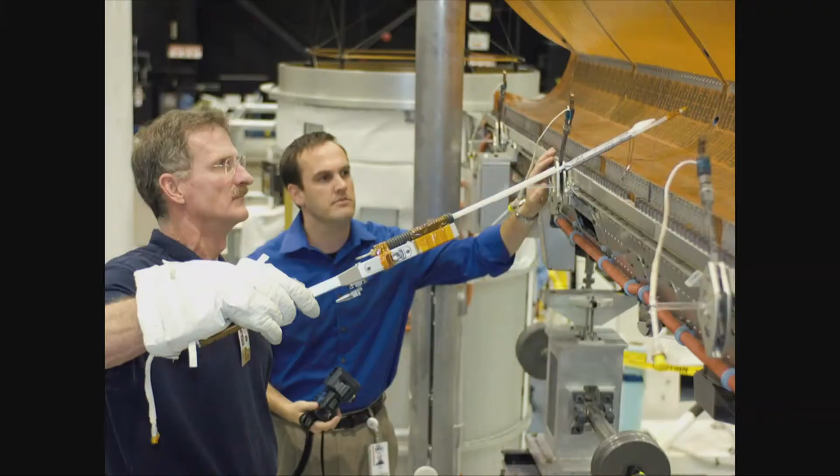What I want to tell you is what happens now. Ground control starts to figure out what we can do. They have experienced astronauts testing in the training center, putting together what kind of tools we have in space that could be useful, and seeing what can be done. And then they told us on board: build some tools in space, use these things and put it together.

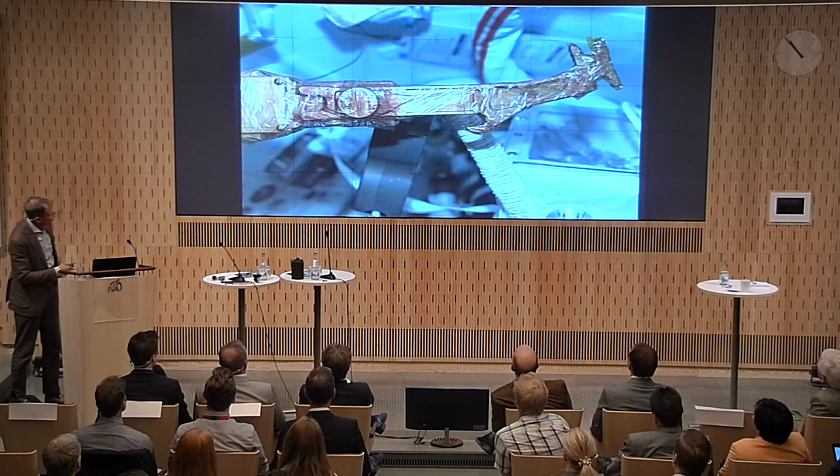So I built this tool on direction from the ground, and as you can see, there's a lot of tape around here, that's insulation tape. That's because the solar array, when the sun shines, is at 160 volts. You cannot turn that off if the sun is on. So we didn't want to get an electrical shock when we went out there, and that's why we had to have 3 layers of insulation tape there. Even on our spacesuits, all metallic parts had to get that.

And so with the help of this tool and some other tools, we made it work out. Here you can see my colleague Robert Curbeam, who made the EVA with me. He's holding this tool, and here is how he's working on it. This fancy photo I actually took by mistake - I thought I was going to take a selfie when he was working out there, and then I realized, oh boy, I have my visor down. I'm not seen, so I raised my visor and got a very bad picture.

But this one here with the mirror effect, you can see Beamer working, using that tool to work on these wires so it could be retracted, and then you see the little nice flag down there also. So, and here is the proof that it finally worked.

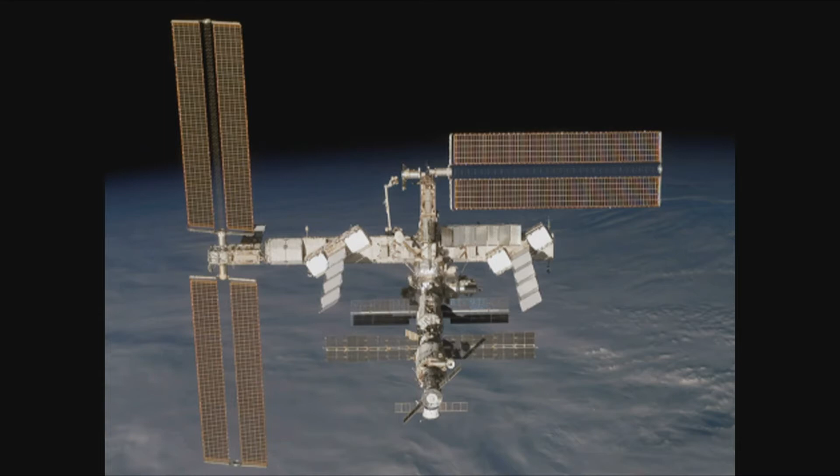You see here, this is retracted. The whole purpose was that on the next flight they had to retract this one, and then this whole piece was moved over here. But that's another story. So you can see how good it would have been if we had had a 3D printer up there that could produce a tool which we needed. And indeed, today we have that up on the ISS, and it was actually even shown by Doug earlier.

Let's see, how do I go back? This 3D printer called Made in Space is up there, and you have to keep it in a glove box, so if something goes bad, nothing comes out into the atmosphere. And here's one of the first tools printed up there in 2014.

Now though, there are some problems having a 3D printer in space. First of all, everything is in weightlessness, so anything that works on Earth may not at all work in weightlessness in space. So you have to make a much more sophisticated machine. And then if you work with metal, it will take a lot of power, and power is limited in space. But I think it is the future for space.

Certainly when we go to Mars, you cannot bring all the spare parts with you, but if you can just send up a CAD file and make it, then you're in a much better situation.

I want to talk about another thing which is now being made partly in 3D for space, because I happen to be part of this. This is an experiment I'm working with at KTH - a small experiment which will be put on the International Space Station next year. It looks like that, and several of these parts are now actually being manufactured by 3D printing.

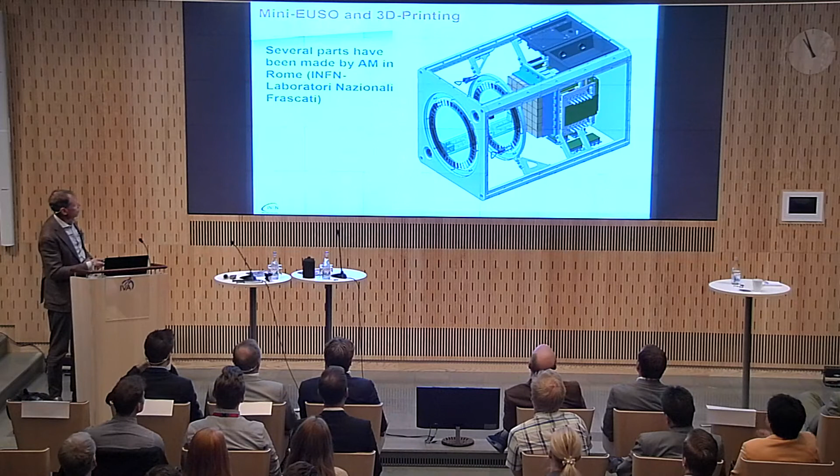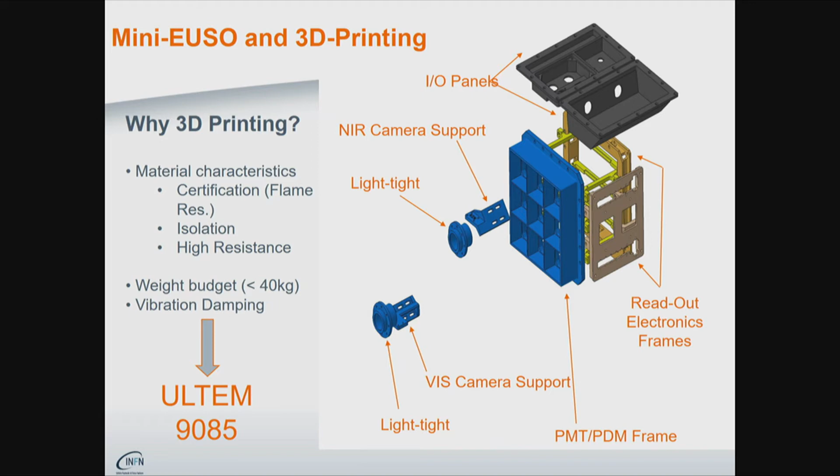So it was figured out by the guys in Rome, who are part of this collaboration and are producing the mechanical housing for this experiment, that it would be a good idea to use 3D printing for some of the parts. These pieces here are the ones which have been 3D printed. And why did they do that? Well, it particularly made the weight lighter, and there were also some not-so-easy geometries to make, so using 3D printing was better.

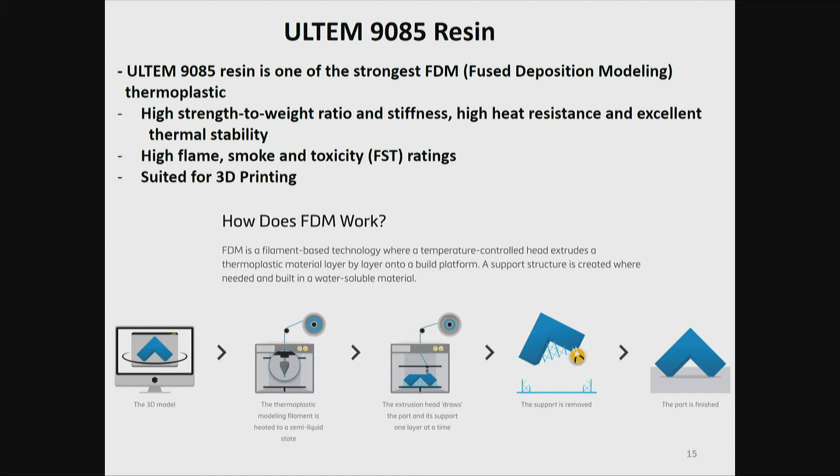Now this is a one-off thing, so you don't have to follow all the qualification steps which NASA was talking about. You do one, make sure it works, and that's good enough in this case. They used Ultem as the material, which is the strongest you can have apparently, using this method called fused deposition modeling. I'm not going to go through how it works, because I think everyone knows that, but at least it's another example of how you can use 3D printing to make things for space.

And here is how these 3D printed parts are now being mounted. Then it had to be made in black eventually due to light tightness. So another example of how you can use 3D printing for space experiments is not really that you want to send it to space, but for other purposes.

This is a student satellite called MIST, which is currently being made by students at KTH under the professional lead of Sven Grahn, Mr. Space in Sweden. He is retired as CTO at the Swedish Space Corporation. Every semester we actually have a new team of students who continue working on this, and it's a challenge indeed.

Another challenge is that we actually have 8 payloads - experiments or demonstrators - on this little satellite, and to get everything to fit together is not easy. So as they say, one picture is better than 1,000 words, well, one 3D printed model is better than 1,000 pictures. So what they've done is 3D print all the experiments, and in the middle you have all the systems for the satellite itself, to see how it fits together.

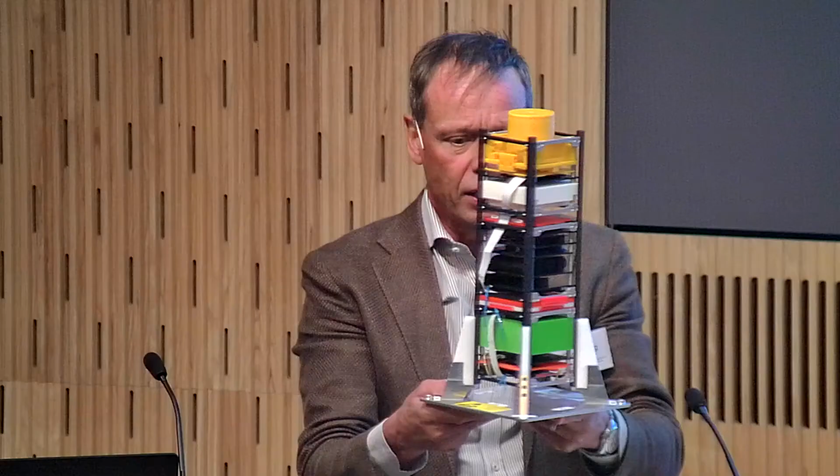Now they're working on how to put all the cables in and get everything connected as well. So this is another example of the usefulness of 3D printing when you're going to space, and it also makes a nice model to show people. So you can have a look at that later.

So I'm not going to go through all these experiments and what they are, but they managed to fit them in here miraculously, actually.

So what is Saab doing then? Well, Saab uses additive manufacturing more and more in various areas. I'm just going to show one successful example here, which is being used at Saab Surveillance, and Martin Blinius there will talk about this tomorrow - thank you for providing me with these pictures.

They needed a new heat exchanger at the antenna assembly on Gripen, and they needed quite many, to solve the heating problem - basically how to cool this thing, if I understand it right. They figured out that additive manufacturing using aluminum was the way to solve this after various other approaches, and it even led to new patents.

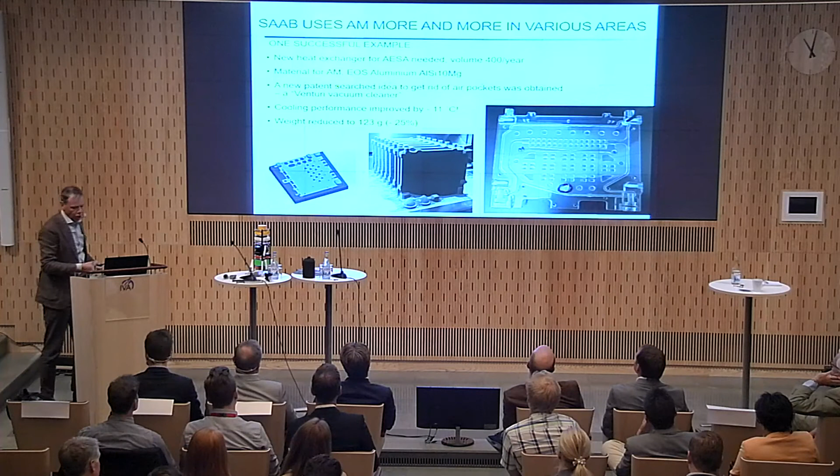Now I will finish by going back to space, actually going back all the way to the moon. We are finally, I would say, talking about going back to the moon again. We will use the International Space Station at least to 2024 - my guess is another 10 years. But discussions are now increasing and even being somewhat more detailed: how can we go back to the moon?

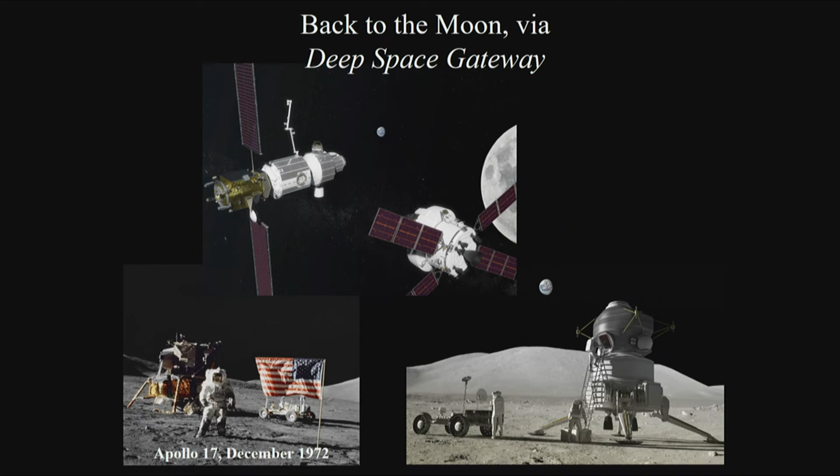The current idea is to build a small space station called Deep Space Gateway, put it in a far orbit around the moon, and from there start doing excursions down to the moon. It will not be permanently manned, but manned from time to time.

It's worth noting that no one has been on the moon since this photo was taken, Apollo 17, December 1972. Next year we celebrate the 50-year anniversary of the first moon landing, which will be a big space year. Now, going further, to build a moon base, how can we do that?

Plans are being developed that the smartest way is to send robots there first and use 3D printing to build a moon base. You try to do the chemistry right now so you can use the dust or sand, the regolith on the moon, to produce blocks through 3D printing.

Then you use robots to build some kind of moon base or moon village, a name created by the current general director of the European Space Agency. It's symbolic of how everybody comes together in a village, and eventually can build there. So here's another future idea, but I wouldn't call it science fiction. It's visionary, but I think this is how it will be done.

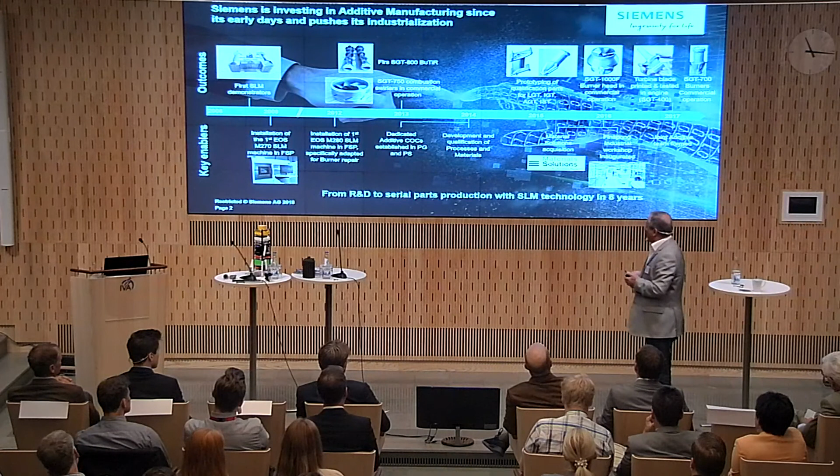We are really pleased to share with you that in general, 8 years is quite a long period, but looking at other technologies - starting from scratch and coming to serial production - it's on the other hand quite a quick step. So in 8 years we were capable of going from the starting point, the R&D project, to serial production. On this picture you can see our workshop in Finspång. We have a first step, and we found this a really challenging and very promising technology. After 8 years of exercises, we decided to expand.

So now we will go significantly forward with this technology in order to gain additional experience and understand the design issue, because this was one of the major stoppers - our mindset, designers' mindset. With the classical approach, just printing what is already there, you will never come to a reasonable cost, and you cannot utilize all the functionality and opportunities from this technology. So this means that we need to change the design mindset.

And then here we also face quite an interesting issue. Usually in a company, what is most important? This is the experience of the people - the key experts, their knowledge and experience. We found that in this particular case, you can face a conflict. The guys with huge experience could not help. They could be the stopper of this technology because they already know where to go. But with this technology, we need to open up.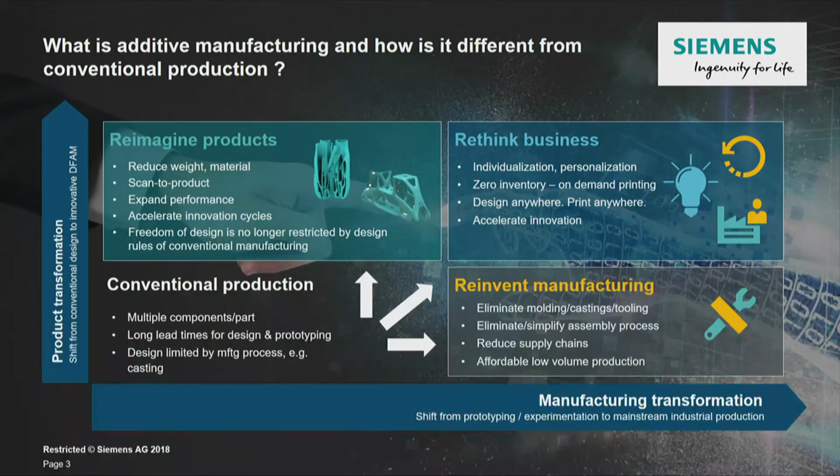So if I briefly go through this in terms of the benefits, what kind of value this technology helps us get - we are talking a lot about digitalization, digital transformation. We believe that additive manufacturing is a part of digital transformation. This is what you really can touch. And then we can see a three-dimensional transformation.

There's a transformation in the product, transformation in the manufacturing, and what is important also, transformation in the business approach. In the past it was quite important to go down with cost by having more standardization, but in this particular case we are coming more to a customer approach - we can customize any product and then track this product. The combination of this transformation in design, manufacturing, and business helps us really integrate the overall approach.

And today, the guy who is doing the design is not just a designer. He gets knowledge already from the manufacturing side because these two pieces are integrated. This is an additional requirement for the staff - what kind of competence, what kind of knowledge these guys have. We're coming to the conclusion that more and more integral knowledge and competence will be required in this area.

I also would like to share with you some numbers which we came through based on what we already did. Maybe start with the first one.

This is a reduction in greenhouse gas emissions. Just due to the definition of using AM technology, we use only the amount of materials needed, not more. Moreover, we can quite often reuse the powder many times, so this means there will be a positive impact on greenhouse emission reduction. We found that on average, based on the components we have, we can reduce emissions by at least 30%. But in the case I showed you - the burner repair - we improved emissions by 80%. This means that to do this repair, we need only 20% of the power we would need for the normal classical repair process.

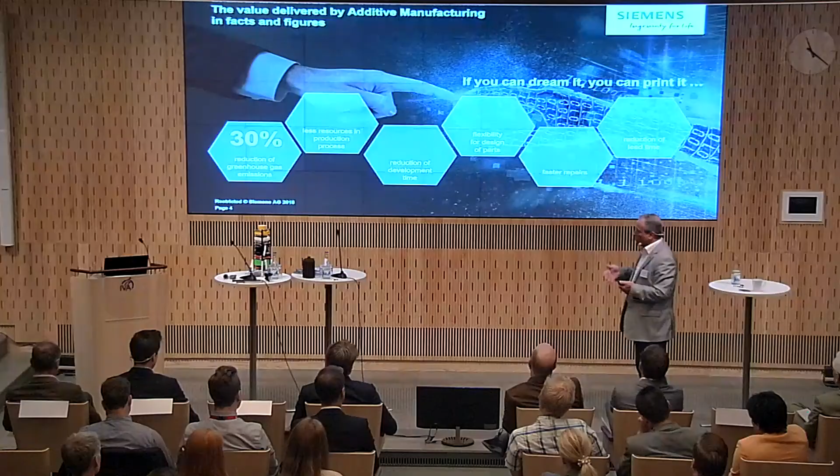In terms of resources, this is also quite an important message. Again, due to the nature of additive manufacturing, we can use fewer materials. What is your opinion? What is your expectation - how much can we save in terms of materials? 20%, 50%? Any guesses? 65.

Great. So in terms of reduction of development time, as already said, we can go from like 2 years to just a few months, and we found that based on what we already did, it's about 75%. And then flexibility in design - I would also like to challenge you in terms of percentage-wise. Any advice? Any guesses?

Yeah, almost 100%. Yeah, you're right.

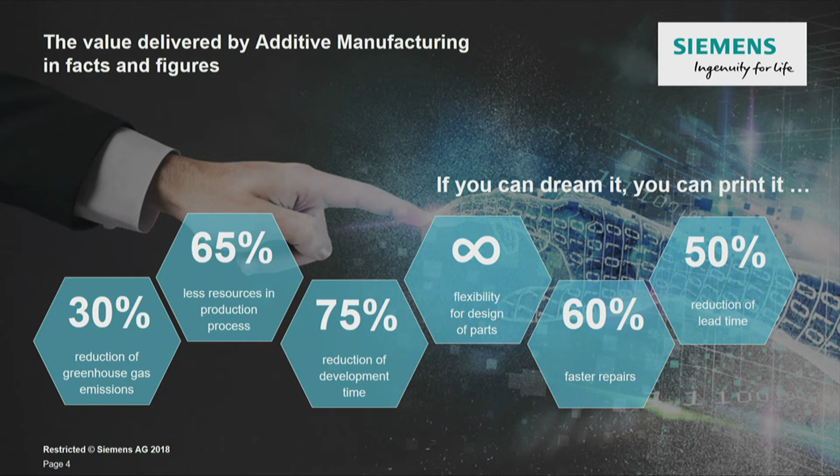I also would like to share with you some examples which we consider a breakthrough, and this is the first time when the blade—I took it in my hands when the blade was designed, when the blade was put into the...

It was designed, manufactured with additive manufacturing and put into the engine for validation. I also want to say there will be no wrong message here. Today we can do design, print and validation in the engine, but we cannot keep this blade for 4 or 5 years of continuous operation, 30,000 hours, because we are still working with nickel-based materials for the rotating parts. It's not completed yet.

But what we did in 2 months instead of 2 years: we came up with a few versions of the cooling system of the blade. We performed a so-called rainbow test—we put these blades into a real engine, performed the test, and picked up the best cooling system. Now we can do the printing and casting of the blade in the normal way. We saved 2 years, and we considered 3 different versions of the system.

We picked the best one, but in the classical way, in 2 years you can only pick up one variant. What is the consequence of this approach? Usually designers are very conservative—they're afraid to make a mistake. This means that with this technology, we can really bring to life something that is extremely challenging but at the same time extremely effective.

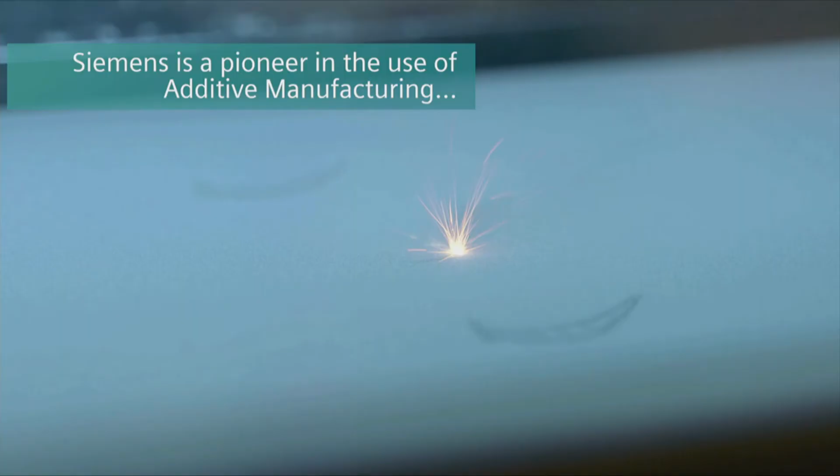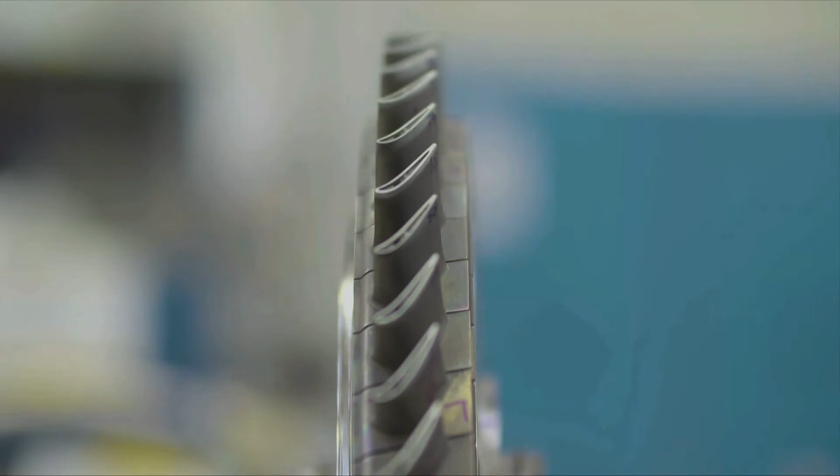The additive manufacturing process enables us to manufacture parts that we cannot manufacture today with normal, traditional manufacturing processes. That enables us to be more ingenious in terms of how we design our turbine blades, how we cool them and how we life them. Turbine blades have always been, I feel, a vision—a real target, the most challenging area of the turbine. So if you can print a turbine blade, you can pretty much print anything. And we've proven over the last couple of weeks that we've been able to print a turbine blade and test it in an industrial gas turbine engine.

In Lincoln, we're testing a 3D printed blade, and we believe this is special because it's the first time anywhere in the world this has been tested at full load conditions in a gas turbine. We test these blades very quickly—in 1 hour we run the engine at full load. We put a probe in here to measure the material temperatures, which tell us how long these blades will last in a turbine. Now the turbine blade itself is this particular blade.

This is the high pressure turbine blade of a 13 megawatt SGT 400. Typically we have to do all of the design, analysis, the aerodynamics, the work in terms of heat transfer on this blade 2 years before we can actually understand in an engine how it's going to perform. What additive manufacture does—and this is the additive manufacture blade we've actually tested in this engine—gives us the ability to cut that lead time down from 2 years to 2 months. It allows us to create new designs, to get more efficient engines and designs into our turbines, tested, and then onto ultimately our customers.

We will see quicker development times. You don't need this very expensive tooling in order to make your products, so that makes additive manufacturing perfect for design modifications—you'll get there much quicker.

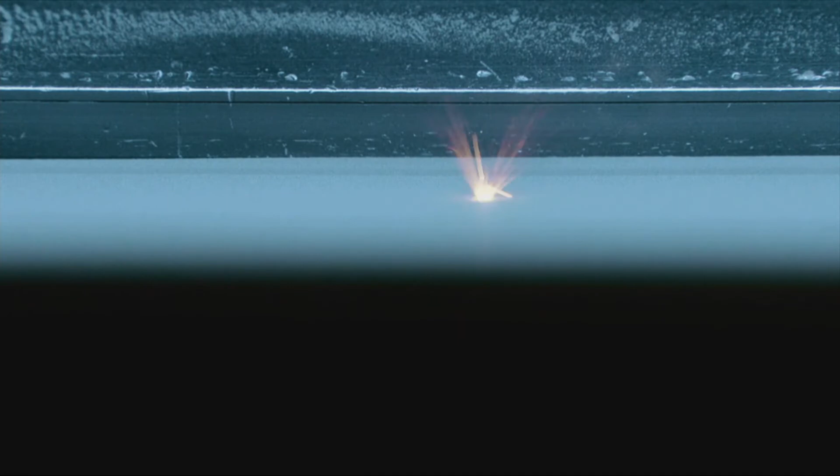The basic process starts with receiving the model from the customer. We then take that model and slice it into very thin layers and export it to the machine. The machine then builds it up in very thin layers, 20 microns, using a laser to melt all of the metal powder together to create the final product.

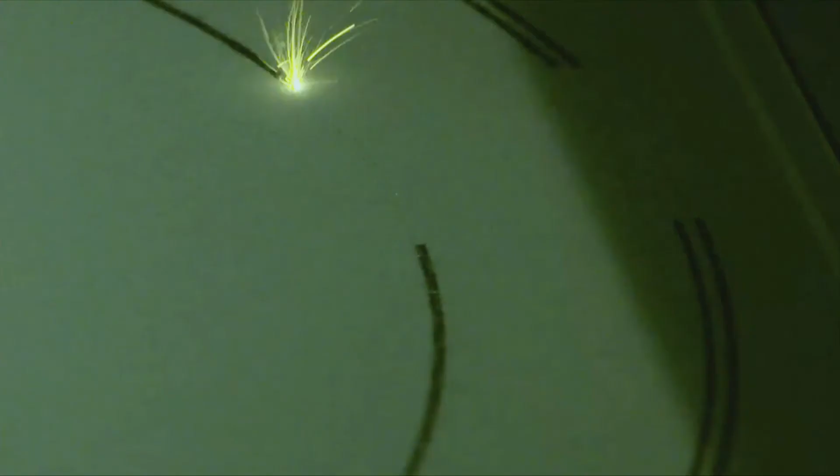Although we've been developing the technology for 10 years, we're still very much at the beginning of the journey of what this technology is capable of. To a certain extent, if you can design it, we can make it. None of this would have happened without the tremendously close collaboration between a large number of Siemens units. It really is ingenuity for life, to enable us to satisfy all of our customer needs.

With this video, I'd like to demonstrate how a mindset transformation can take place. The head of engineering, who now promotes this blade, said two years ago, 'No blades in the engine, only after my dead body.' Now you can see he's pushing this technology across the organization.

I was very proud that this blade and our team was awarded, first of all, in Siemens - we have yearly awards - and maybe most important, our results were recognized and awarded by the ASME conference as well. We got the ASME award last year.

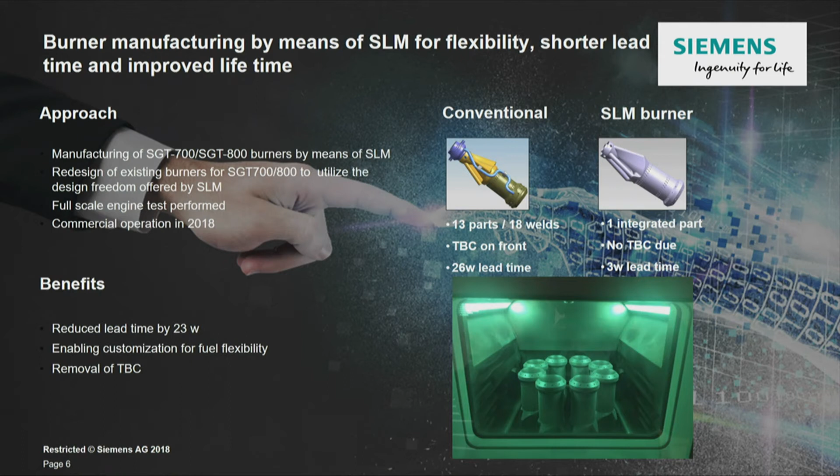So another type of application is in production, where we can significantly reduce the number of components, replacing a complicated assembly with only one, while at the same time increasing the lifetime and improving efficiency.

I'd also like to share our experience, which from my point of view is one of the most important things: how many hours we've accumulated in very tough environmental conditions for the burner. More than 30,000 hours for the repairs, for the swirlers, more than 30,000 hours. We've already put the burners into commercial operation, and we have quite good cooperation and co-creation with our customer, who is willing to give us their engine for prototyping and validation of components, if we are doing this in the right way.

Maybe I'll skip the challenges. I'd like to mention, as I already said, that we recognize cooperation is extremely important. Siemens is very active in Sweden in terms of cooperation with different universities and research centers.

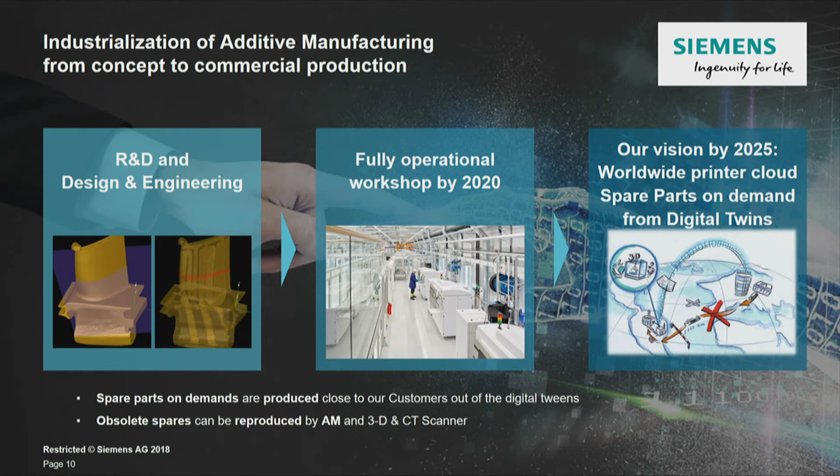Maybe finally, our vision: we would like to utilize the latest design knowledge and technology, and use X-ray tomography to get quick access to the geometry. We would like to have a fully automated workshop - we already have one in Finspång - and in the future we're looking for so-called printer clouds, so our printers will be distributed around the world in Siemens workshops, very close to our customers. We will move toward principal spare parts on demand, using the digital twin of old components for tracking, and then print the components only when and where they're needed.

So this would be my last slide. Sorry if I squeezed things a bit, but maybe during the plenary discussion we can discuss the challenges and opportunities of this technology.

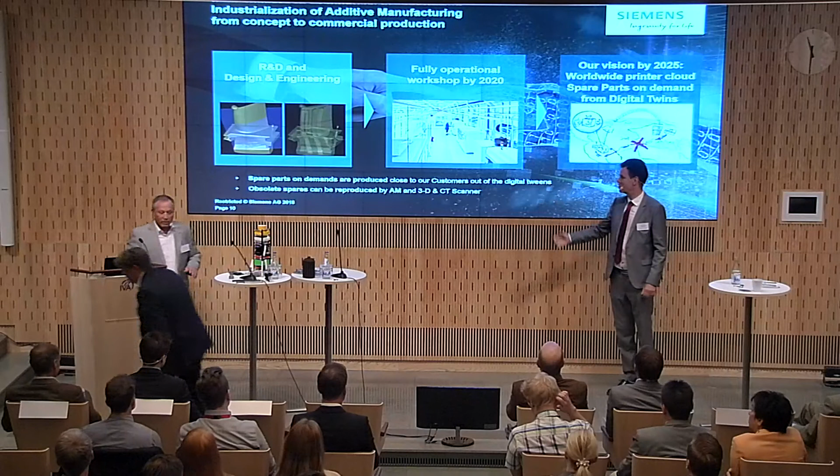And I'm sorry for rushing you. The only thing - I'll let you guys hold a blade. It would be great if I can get it back afterwards. And then there's another one, I think that's fair, for the aero-derivatives.